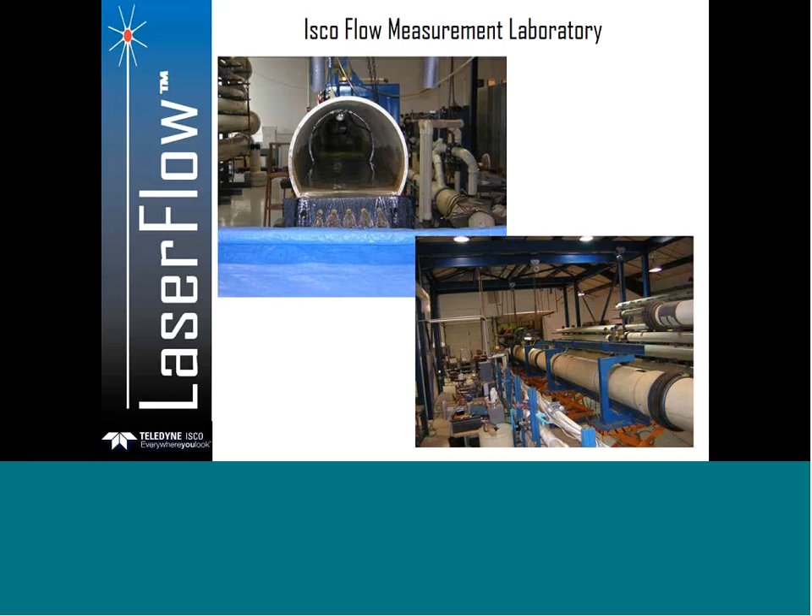Okay, let's do a quick review of area velocity flow measurement techniques. Q, your flow, is equal to the area of that flow times the velocity. To get the area measurement, we do a level measurement, and typically we use a pressure sensor. Those of you familiar with 2150s out there know we use a pressure sensor, but there are also ultrasonic sensors. In the case of laser, that's what we use to get our level measurement.

For our velocity component, we use a Doppler technique. There are some others out there, like electromagnetic, but for the most part Doppler is the predominant one in the industry. There are different types of Doppler velocity measurements - some are called contact sensors and some are non-contact. A 2150 contact sensor would be one that's mounted on a ring in a pipe, and the non-contact, of course, would be the laser.

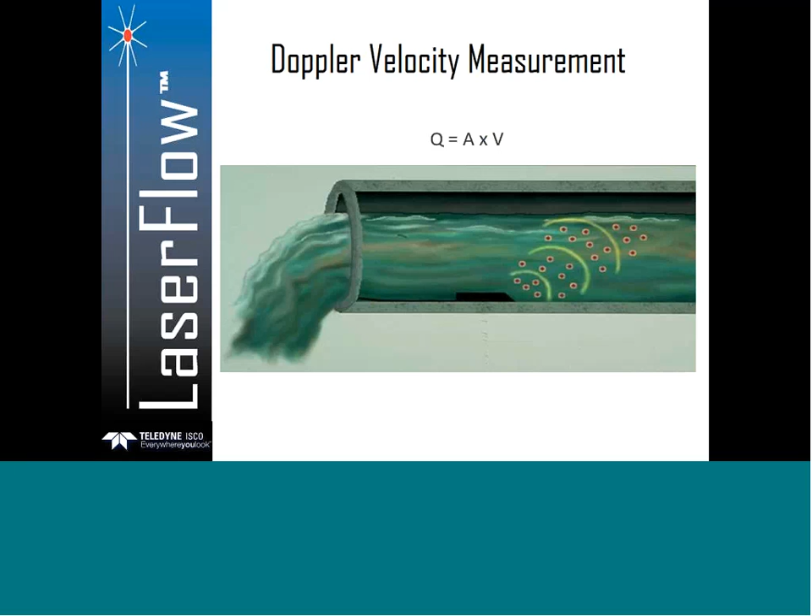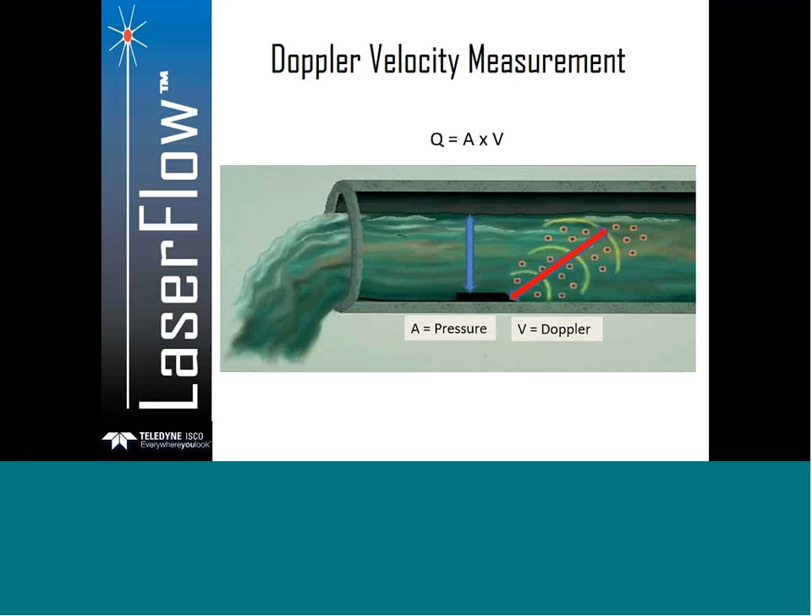This is a good little artist rendition of what we're talking about - a continuous wave area velocity sensor mounted on a ring in a pipe. To get the flow, we need the level, so we use a pressure sensor to measure the water depth, and we use a continuous wave Doppler sensor technique to measure the average velocity of the flow. These work very well and have been out there forever as the workhorse of the industry, but they do have some limitations to how effective and accurate they are as you get into deeper and deeper flows.

All right, so let's talk about some applications you might see in the industry. We design for collection systems, although we're more and more involved in wastewater plants as well as water plants. But initially, laser was designed for collection systems. We designed them for large pipes - we've defined large pipes as anything greater than 36 inches. And for small pipes, we find more and more applications all the time now where people are trying to measure flow in pipes smaller than 36 inches, a lot of times even as low as 6 and 8-inch pipes.

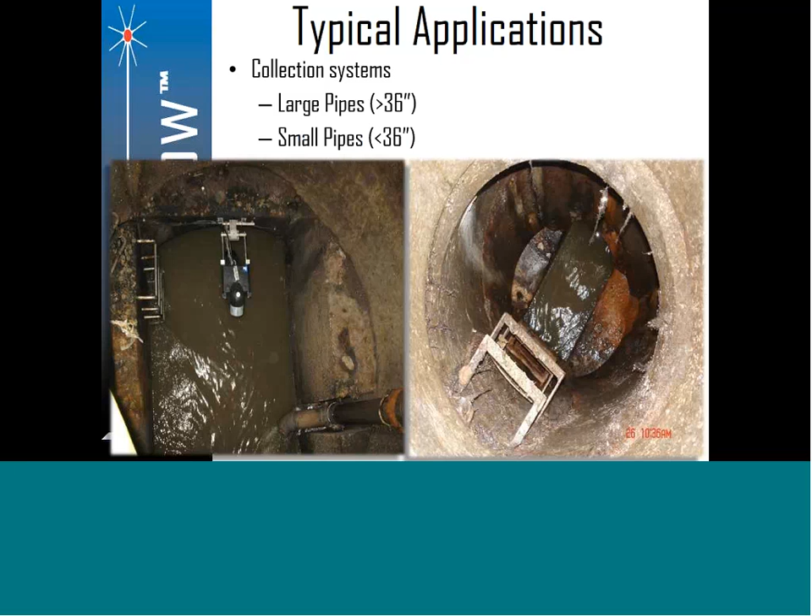So some applications we're going to talk about - the one on the left, you'll notice, is a large pipe, very dangerous; you don't want to get in that flow if you can help it. But the one on the right is more and more the residential or private property I&I monitoring that we're seeing out there. One thing we think we've done a pretty good job of is coming up with LaserFlow, and we feel that that truly is one of the keys to unlocking a successful monitoring program.

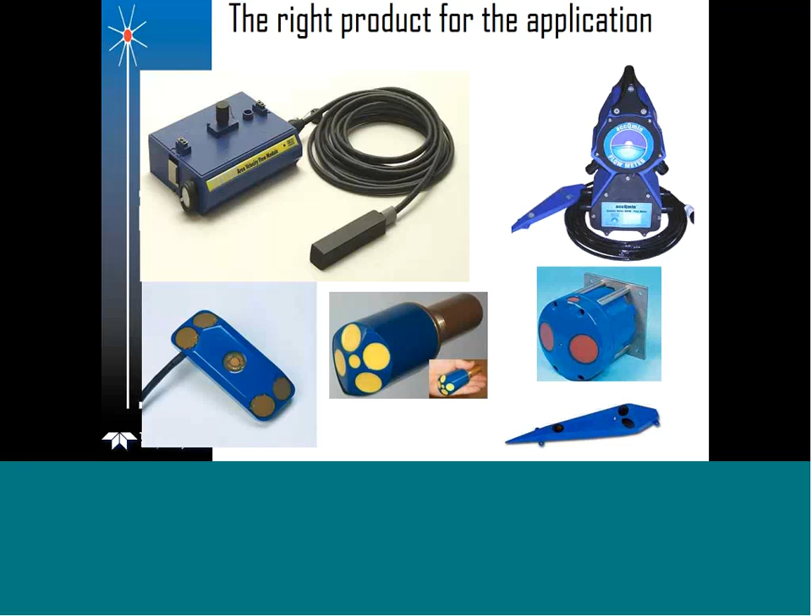However, with any application, we want to look at what your goals are, what the application is. I want to make sure we provide the right product for that application. Our field support people, our sales reps in the industry are probably the most trained in the world. They are very knowledgeable about product technology as well as applications, so they do a great job for you. We also have internal staff in our product support group who have a great deal of knowledge and expertise in these areas. Bottom line is we want to provide the product that's going to best suit you in your application.

We've always said not one size fits all. That's still true today, but I will say the LaserFlow is proving to be the closest thing I've seen in my 30-plus years of doing this to the one size fits all. Nothing's perfect, nothing fits every application, but the laser is about as close as it gets at this point.

Okay, so let's talk about the laser. Theory of operation - I'm going to go into more detail with this on individual components, but as an overview, what we do is we have an ultrasonic sensor mounted in the back of the laser. It transmits a sound wave, reflects off of a 22.5-degree deflector molded on the side, or in the back of the laser, and we know where the water depth is.

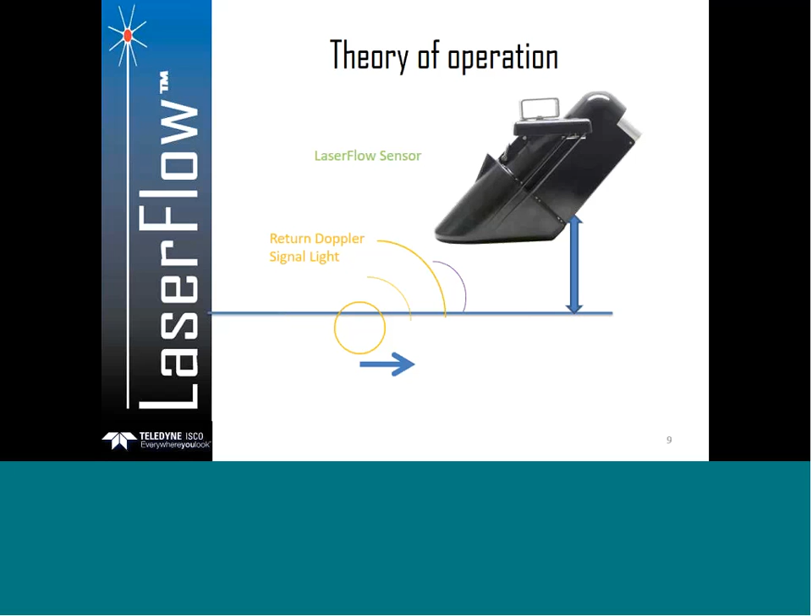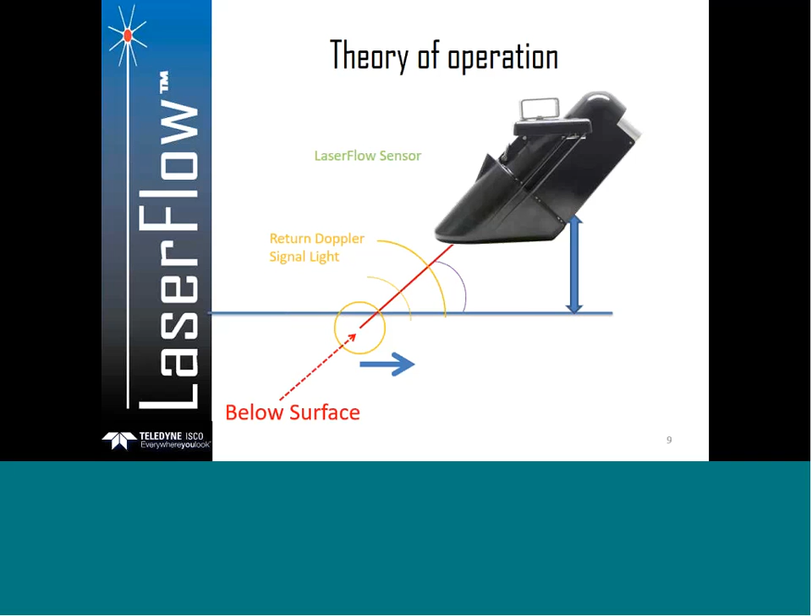Once we know where the water depth or water is, we know where we want to take our reading. We focus the laser below the surface of the water. This is key, and part of the patent of the laser is subsurface velocity measurement. There are other, I would say, me-too kind of products out there that do non-contact velocity, but all of those are surface velocity. Laser is the only one that actually goes below the surface to get the velocity reading.

Before we get into the laser velocity, let's talk about the operation of the ultrasonic sensor. One thing we try to do here at Teledyne Isco is really look at what is currently available in the market, things that people do right, and maybe areas that we can improve. One of those areas was the ultrasonic sensor, and you have both the velocity measurement as well as level.

So what we did on the ultrasonic sensor was we heard comments that if the sensor is mounted straight up and down, you could have condensation cling to the face of the sensor. What we did on the laser design is we went in and put that sensor in the back of the sensor housing, and we angled it. What that does is any moisture in a manhole, which we know is common in a manhole environment, will drip right off the edge of that sensor and not cause a problem. Also, if that sensor does go underwater, it will just run right off once the submergence goes away, and away we go with our level measurement.

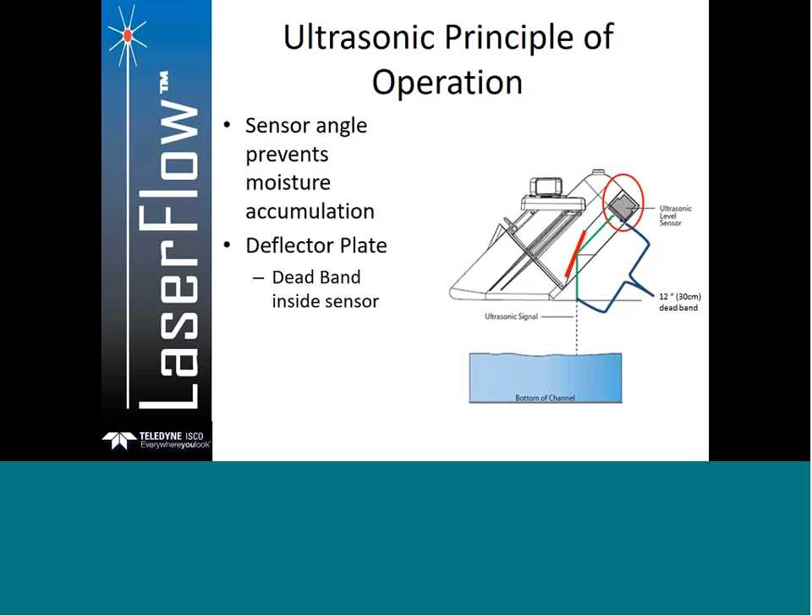Again, we shoot off that deflector plate. One other thing we've done is looked closely at a deadband. A deadband is a blanking distance from the ultrasonic sensor face to a known distance. In the industry, it's very common to have a 12-inch deadband, and we have one in this sensor. So what we want to do is minimize that effect, and the way we've done that is by putting the ultrasonic in the back of the laser sensor, and now we take into account that 12-inch deadband in the body of the sensor itself. For that reason, we now have virtually a zero deadband ultrasonic, so water can go all the way up to the bottom of the laser before it will not read level.

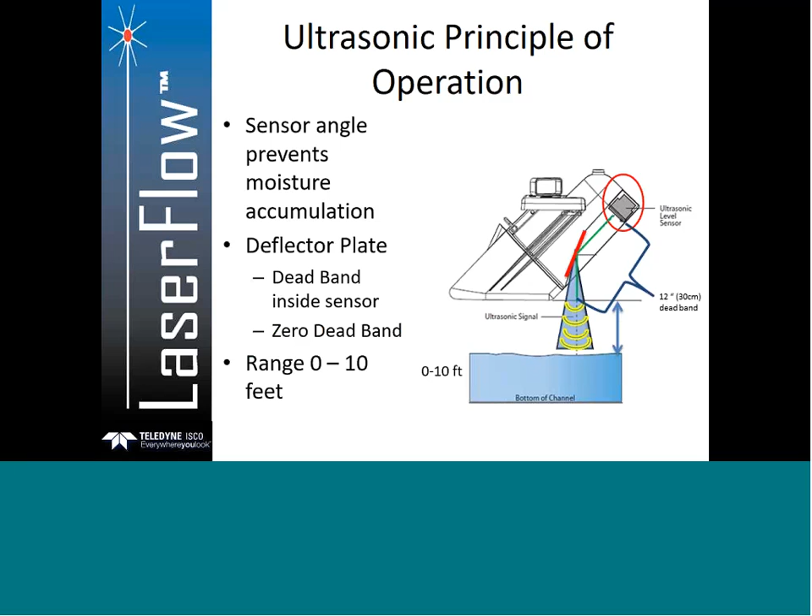We have a range of 0 to 10 feet, so for 98%, 99% of the applications we deal with, this handles that range quite well. We don't care if it's a foot away or 10 feet away from the flow. All right, so that's the ultrasonic level sensor, and again, it's been very, very successful for us.

Let's talk about the laser itself, though. A laser pointer has a constant focal point, which means our focus point goes on and on, pretty much to infinity. The way the laser works, though, is we need to focus that laser signal or the laser beam into a known point so that we can get a good representation of the water velocity. So what we do is we know where the water surface is, and we know where we want to focus the laser.

We basically move the laser until we get the smallest point or tightest focal point on the laser beam. What that does for us is give the maximum intensity or signal energy back to the laser. Like any Doppler device, we transmit a known frequency, and based on the frequency return or shift, we can calculate the direction and magnitude of the velocity reading.

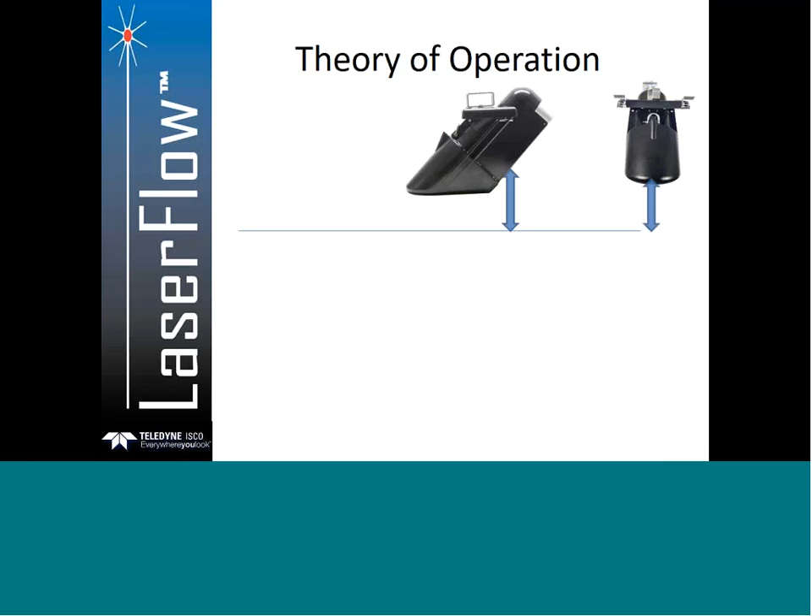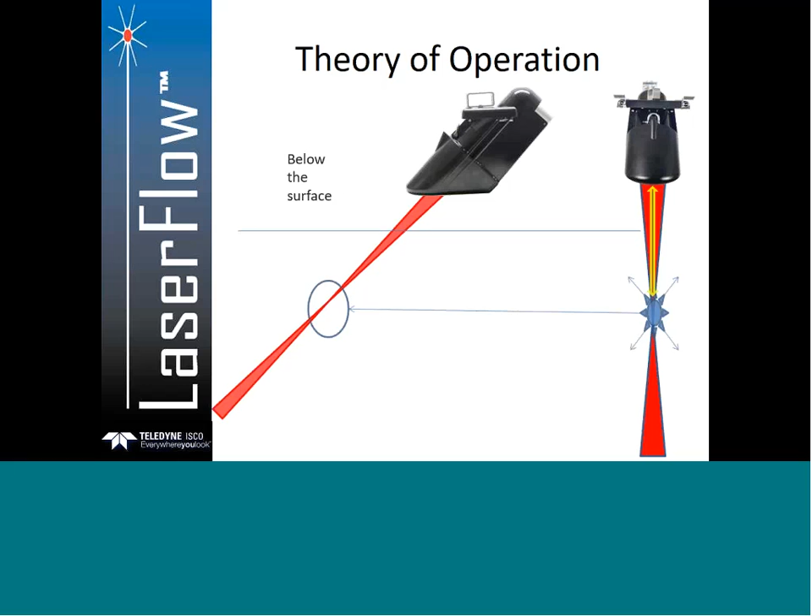To give you another look at what this does: the laser knows the water level, knows where it's at. Once it knows where it is, we focus the laser below the surface. This is a little exaggerated, but if you stuck your hand under the laser in operation, the beam coming out is about the size of a coin. Where it focuses, though, is a very tight laser-like point below the surface of the water, known as the converging section or point of convergence, which is key. This is where we want to look for our velocity readings.

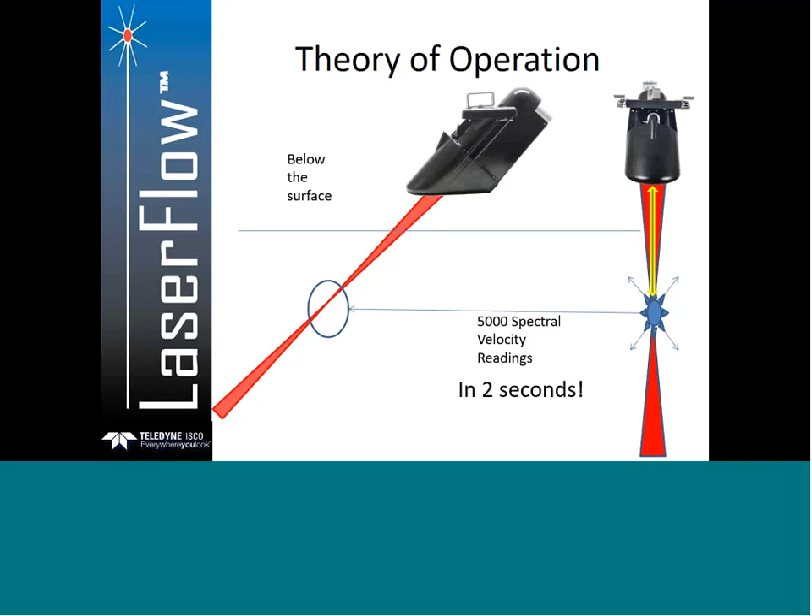What's amazing is we take 5,000 spectral velocity readings, and we do this in roughly 2 seconds. By comparison, going on the concept of continuous improvement, Laser 1, released in early 2014, took about 40 to 45 seconds to do the same 5,000 velocity spectrum scans. The firmware's been updated and improved, and now we do all of this in 2 seconds. So a lot of improvements have taken place since the early release. Some of you who worked with the laser early on will notice a distinct difference in performance.

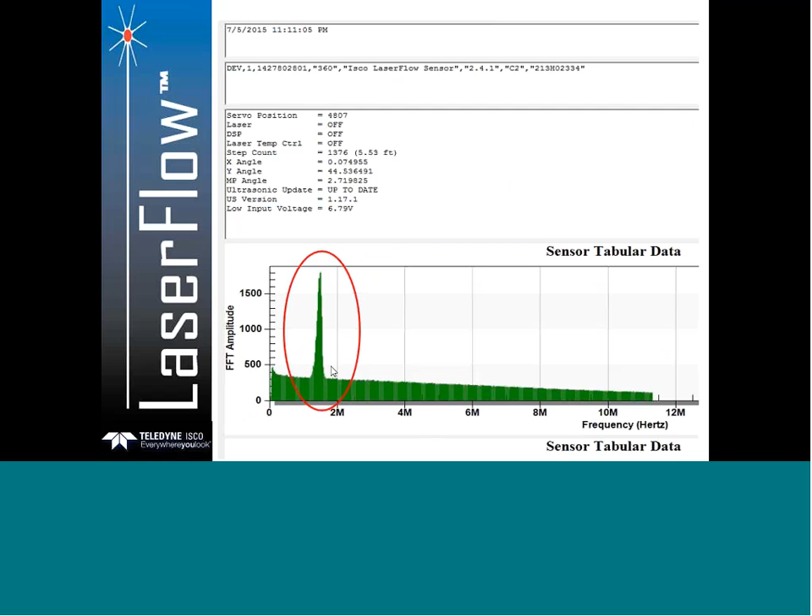Okay, this is really what it's all about: this is the velocity spectrum. If you look at my cursor, you can see zero velocity. To the right is the frequency, or the speed of the water. This peak is what we're really looking for. It's made up of those 5,000 velocity scans. The more of those 5,000 that agree on that frequency, the more area under the curve, and the better looking this signal will be. This is very key in setting up a laser as well as post-processing laser data. When I look at this, I have no question we are getting a very good velocity reading at that location.

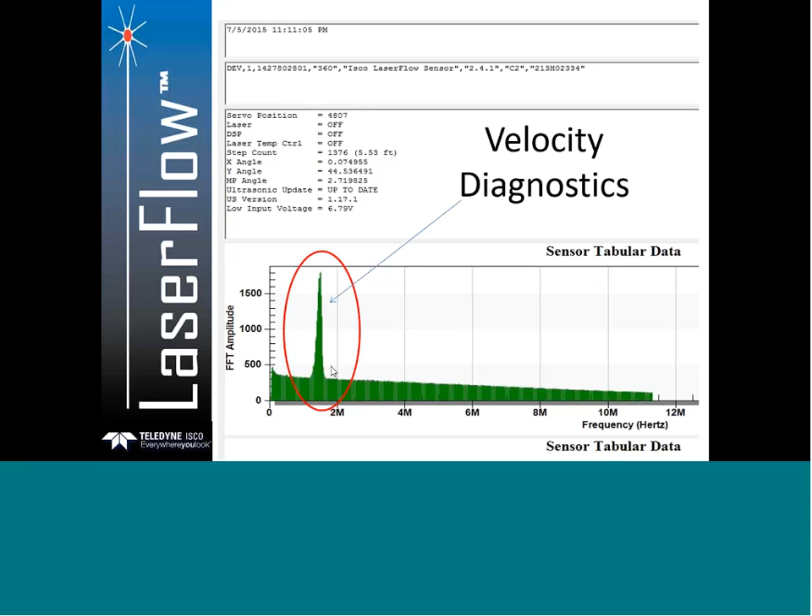These are known as velocity diagnostics. We are a little bit overkill sometimes on velocity diagnostics. Everybody can give you a nice pretty line and a nice pretty graph, but what we're really keyed into is how good that number is, and the velocity diagnostics help you determine that.

Okay, so this is another snapshot of what you'll get from the laser. One reason we're able to read clean and slow water is the signal-to-noise ratio. Any Doppler device, whether it's a sensor in the water or a laser, it's all about the signal-to-noise ratio. The laser has incredibly clean signal compared to the noise. So that's what we're looking for right there.

That is our return spectrum, made up of 5,000 velocity readings. This is the noise floor. As we go towards the left, towards zero, that is zero velocity. Laser vintage 1, 4 years ago, 3.5 years ago, that noise floor was considerably higher. That meant the minimum velocity we could read then was about 0.8 feet per second. We can now read down to our new specified 0.5 feet per second, and in some cases, actually a lot of cases, we'll read even slower than that. So it's all about signal-to-noise ratio.

Some of the engineers were able to figure out some things. They cleaned up the electronics, and now the new laser you'd buy today is further improved.

This is really a measurement of the quality of the velocity reading. It's also a value we quantify as Doppler power, which is stored in memory. When you graph that Doppler power, the value we're looking for is anything greater than 1,000. As long as we have 1,000 or higher Doppler power, we know we're getting a sufficient amount of return from that spectrum, and we like what we see. This is very key information — it's like an MRI, as corny as that sounds, when you're looking at a laser velocity reading.

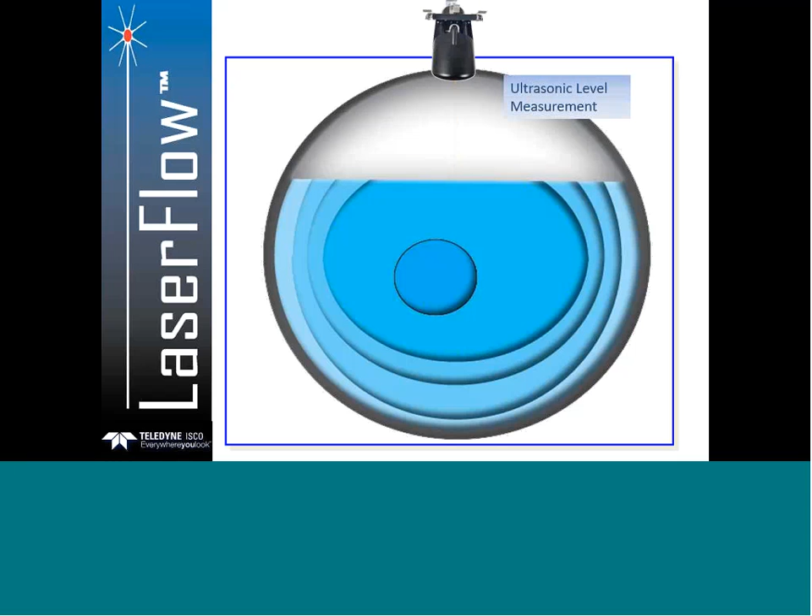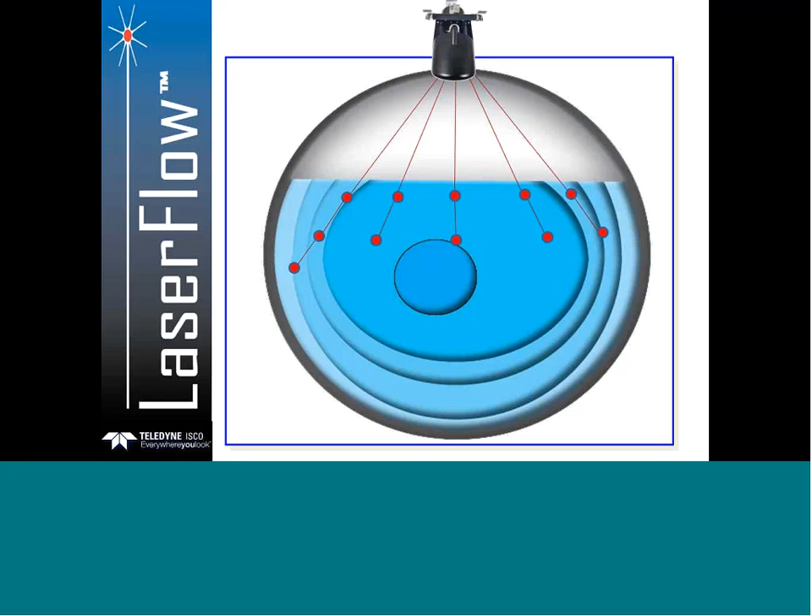So the laser can be set up. It reads the level, knows where the water is. Once it knows where the water is, it can then start taking its velocity readings. It's able to scan horizontally 5 points as well as vertically 3 points. This is known as a multi-point, multi-depth velocity method.

The laser is very unique in that it can take readings from multiple points throughout the channel without being in the channel or the flow.

Each one of those, keep in mind, is 5,000 velocity readings. So if you do the math, with 15 points you're really taking about 75,000 velocity readings, and it does all that in roughly a minute and a half.

I often get questioned, why wouldn't I do all, or when would I do individual ones? It really comes down to power. How am I going to power this thing? Is it remote? Am I on batteries, AC powered? Is it billing? How fast do I want readings? All those come into play.

So if it's a remote location, what I'll do is turn all 15 on and see how uniform my velocity is. If things look fairly uniform, a lot of times I'll just put 2 on. The reason I do 2 is so I have a second opinion. If something comes floating by at the time it takes one reading and gets a bad reading, I want it to have another chance of getting a good reading. But this is completely user definable.

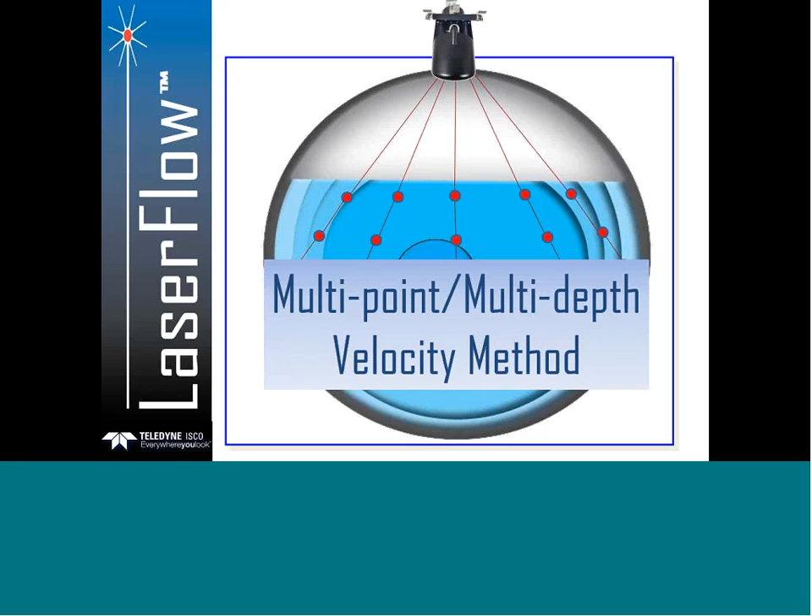All right, so let's talk about accuracy. We've done a lot of field testing in the marketplace, and these are all really customer tests, and we've had incredibly impressive results.

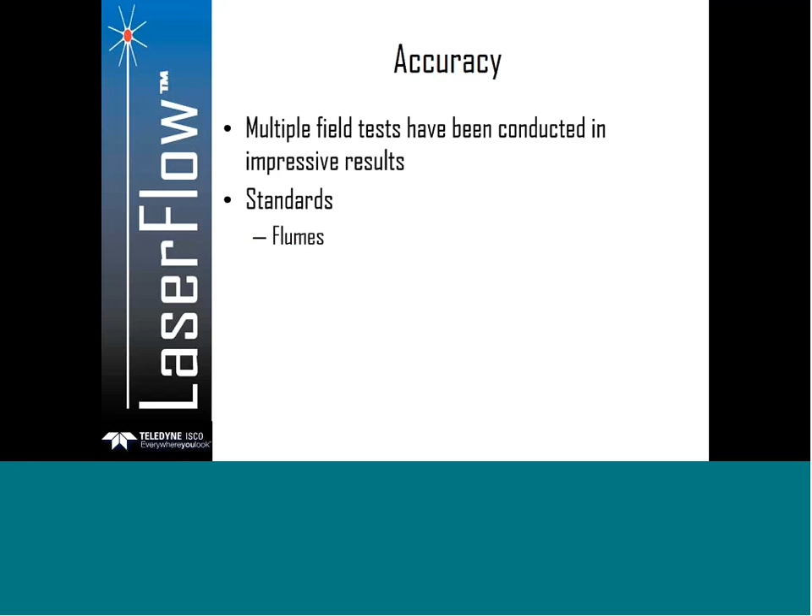Some of the standards they've been compared to, as you're all familiar with, flumes. Flumes have been out there forever. Flumes are traditionally expected to be roughly a 5% accurate device if they're installed correctly and all conditions are right. What I'm finding is that flumes are not always right, and just because you pull out your Isco handbook and look at the level reading and it did the math right doesn't necessarily mean the flume is right. So more and more lasers will be used to verify the accuracy of flumes, but flumes have been compared to laser over the past several years.

Magnetic flow meters, another one that's popular out there. Obviously, mag flow meters need a full pipe for the most part, but we've been compared to a lot of those mag meter applications as well.

Acoustic Doppler, or ADFM, range-gated Doppler. For those of you that have been doing this for a while, MGD might come to mind. These are pulse Doppler devices that measure a velocity profile through the channel. We've been compared to those as well. We sell those or offer those as a product, and the laser compares very favorably to that technology.

Transit time, or multi-path transit time, there are multiple sensors in a pipe that measure the velocity distribution as well. Also considered to be a very accurate standard, and we did quite well with those.

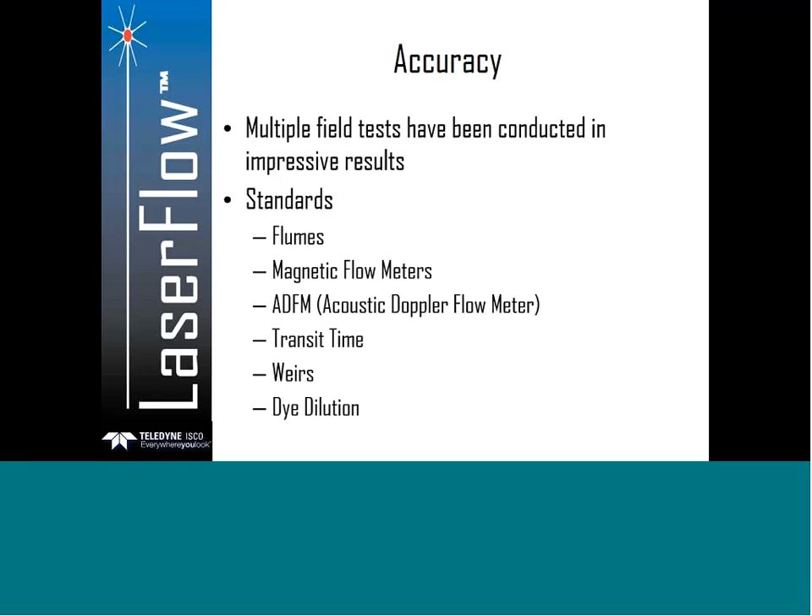You have weirs out there. Weirs have been around since the dawn of time. We know a level reading, we know the shape of the weir, and we can calculate the flow. Again, roughly a 5% device. And then there are dye dilution tests that have been done compared to the laser as well, and it's done very well in every one of these comparisons or standards.

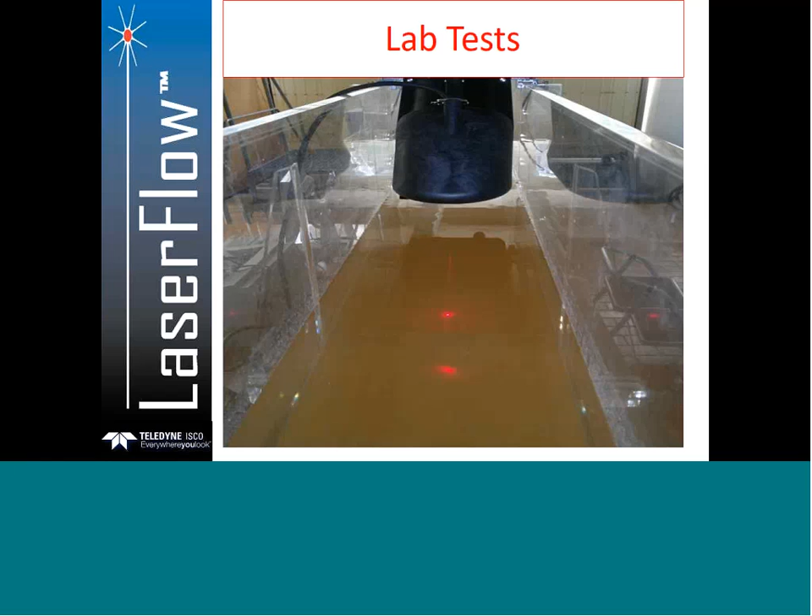Okay, so then you finally get to, well, how do you do against the lab? Let's do some lab testing and see how we do. This is kind of an interesting photo, I thought I'd throw that up there. It's actually showing 2 laser points, but in reality it's one. You'll see the top one's hitting the water, and the one at the bottom is actually hitting the bottom of the channel.

So, accuracy. Our current published specified accuracy is 4% of reading, which I should mention is the most accurate non-contact velocity or flow spec in the industry.

We have done third-party test results. We did some testing with a facility called the Irrigation Training and Research Facility at Cal Poly San Luis Obispo, California. They are very well respected and known in the industry out there on the West Coast. We were found to be at about 1.8% absolute error, so we did very, very well in their testing.

We also went to the East Coast, to another facility called the Alden Research Lab. Alden is another very well-respected flow lab on the East Coast, with a little different setup there. We were at 2.7% absolute error. So in addition to all the field testing that's been done, we now have third-party results that support the accuracy of the laser, well within our 4% spec.

Okay, so let's talk about some difficult applications. There are many out there, and we're finding more and more all the time. High velocity, low level is a common one. Where you find those are in steep slope pipes. Since the laser came out, I'm amazed at how many of these types of applications we run into these days, and I'm going to talk about how we're able to overcome some of these challenges.

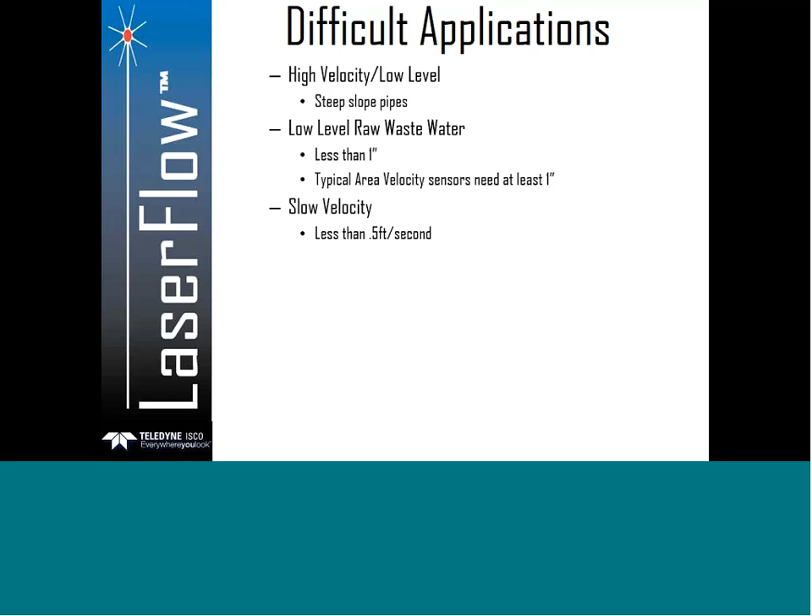In many cases we run into sites much lower even than that, and the laser will work quite well. We find these a lot in residential collection systems, and we're seeing a lot more private property or personal property I&I studies going on, with some of these applications. Slow velocity also has a tendency to silt over a sensor, so it becomes a challenging thing if you have a sensor on a ring in the pipe.

Slow and clean applications - I'm talking about wastewater effluent, sometimes not necessarily slow, but it's going to be very clean. Chlorine contact or UV disinfection channels - these are another part of the application market we are becoming more and more involved in. People want to measure the chlorine contact chambers and UV channels, and there's nothing out there that's been able to do that effectively until laser.

Drinking water plant effluent - we have more and more applications where, not only dirty water, but clean water, they want to measure what's coming into the plant. The water tends to be fairly clean, and a traditional sensor a lot of times will have a difficult time measuring that. Stormwater monitoring isn't going away, it seems to be picking up.

Stormwater challenges include wide fluctuation in flow conditions. So you may have very low flow or no flow, and then you could have a raging rapid when things happen. So those are challenges. Irregular shaped channels - almost all stormwater lines, unless they have a good defined circular concrete culvert, will run into some irregular channels. I'm going to show you how we can deal with those as well.

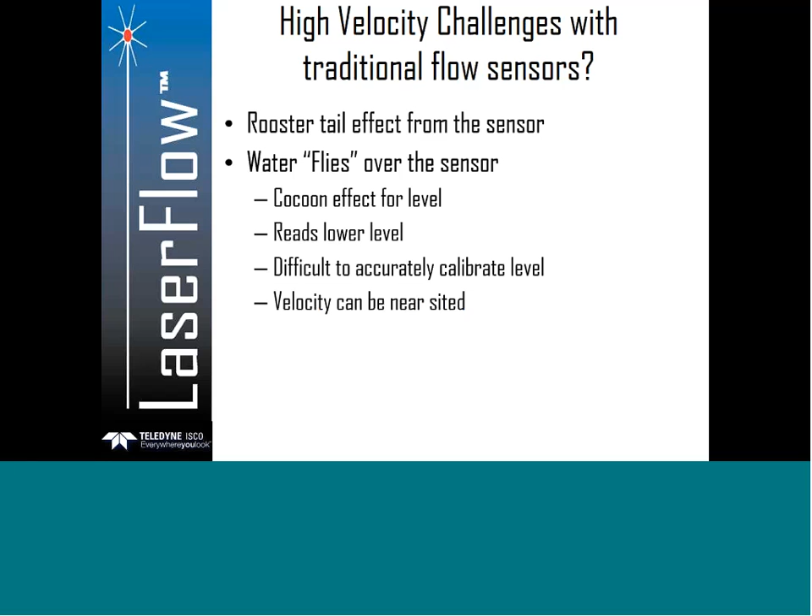That water's moving through there at 4, 5, 6 feet per second. Sticking a ruler in there is not a fun experience, and it's very, very difficult to calibrate. When we have that much stuff coming at a sensor, an area velocity sensor, you have a lot of entrained air, a lot of particles moving at very high velocity, which can tend to make the sensor slightly nearsighted, affecting the overall accuracy of the velocity due to some of the noisy water hydraulics.

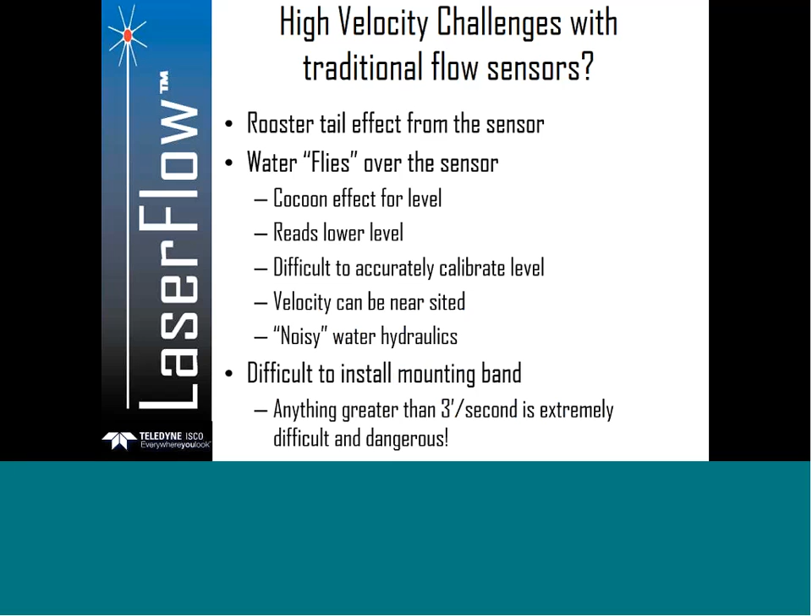And as you know as well, there's difficulty in installing a mounting band. The people I've talked to out there that do this for a living have told me, as a general rule, if it's 3 feet per second or greater, it's going to be very, very difficult, if not impossible, to install a ring, as well as being extremely dangerous. Nobody wants to be in flows with those types of conditions.

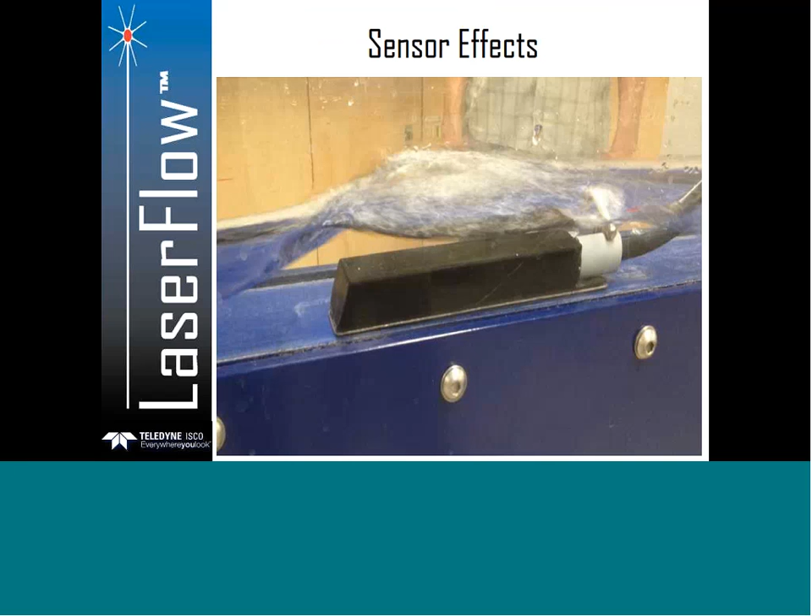This is kind of a neat shot I liked. It was from a lab in Europe, but you can see just the hydraulic effect of high velocity over a sensor that's in the flow stream.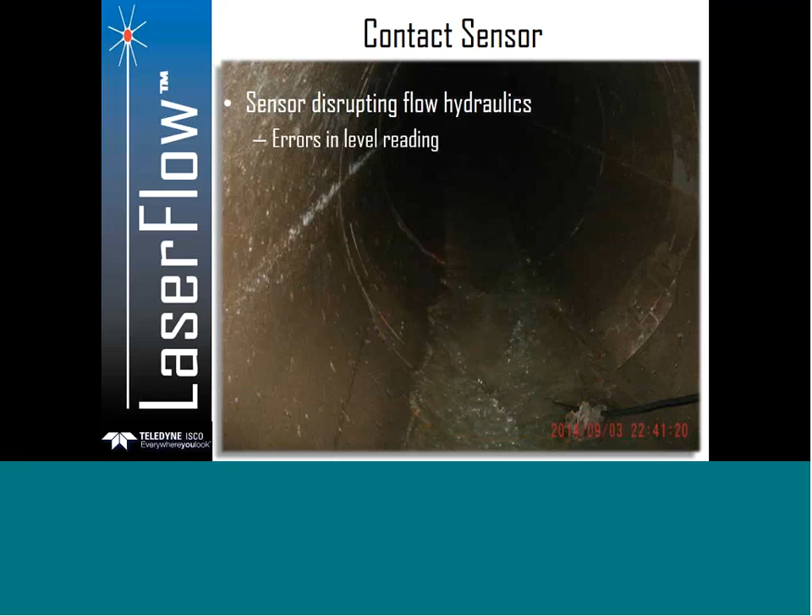Okay, this one was a good photo. It's a little difficult to see, but if you look up in there, way up before that first pipe connection, the flow is very uniform hydraulics. Once it gets closer and hits that first pipe joint and then the ring, it starts getting very turbulent. What's going to happen is you're going to have errors in both level as well as the velocity readings, and then your cable is going to come loose from the band eventually due to high velocity.

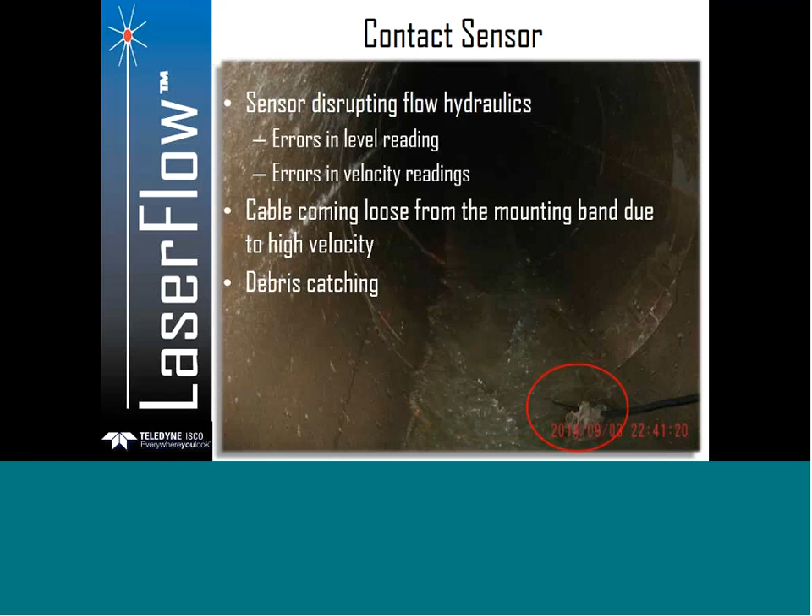All cables used, or cable ties, are not going to last forever. So in a case like this, if it's a long-term plan, there's a good chance it's going to come loose, you're going to catch debris, and all those things. So any contact sensor could suffer from these types of issues.

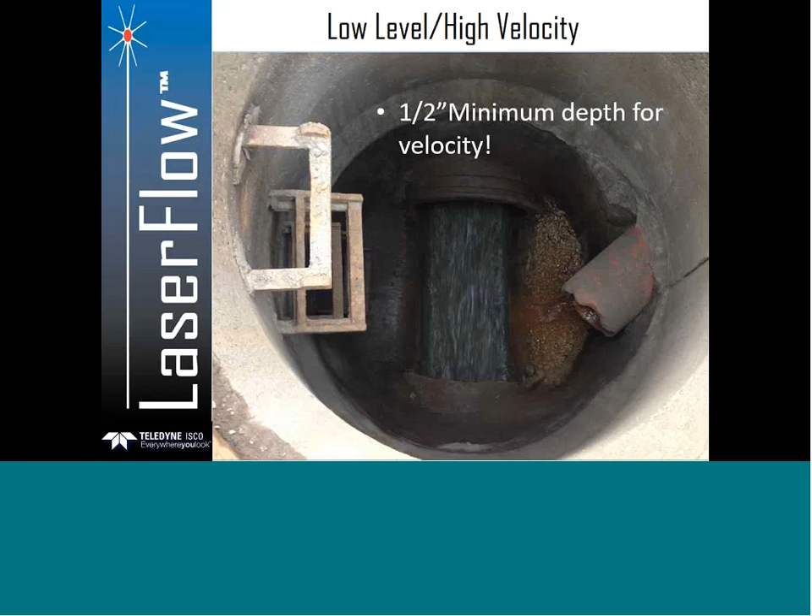So let's look at another application. This is a low-level, high-velocity application. Level is, in this case, below an inch. The specification for the laser right now is we can read velocity down to a half an inch per our specification. Having said that, we have cases where we've actually read much lower than even a half an inch. Our velocity spec is 15 feet per second, so we can read all the way up to 15 feet per second.

So this is a high-velocity billing application. They decided there's no way you could put an in-pipe sensor in there due to both the hydraulics, the depth of water, and the velocity. So what we did is we went ahead, they bought a laser, 2 bolts hold it in place. It makes it very easy to install in this location. It should be noted that the laser can be installed both upstream and downstream.

It doesn't care which direction, and it can read bidirectional flow. So very, very capable technology. It also has a built-in accelerometer, so it knows its X, Y axis. So when they install it, you can tell exactly where that laser is positioned. X is 0 plus or minus 3 degrees, Y is 45 plus or minus 3.

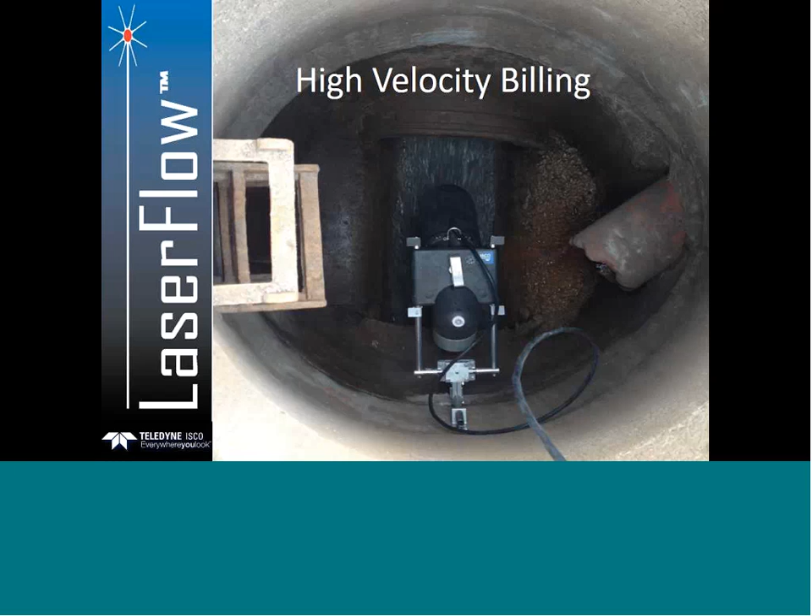The Y angle can affect the accuracy of the velocity reading. What's unique about the laser is that it knows where it's physically mounted. So if the install is not exactly perfect, it will compensate for that error with the built-in accelerometer, further tuning your accuracy.

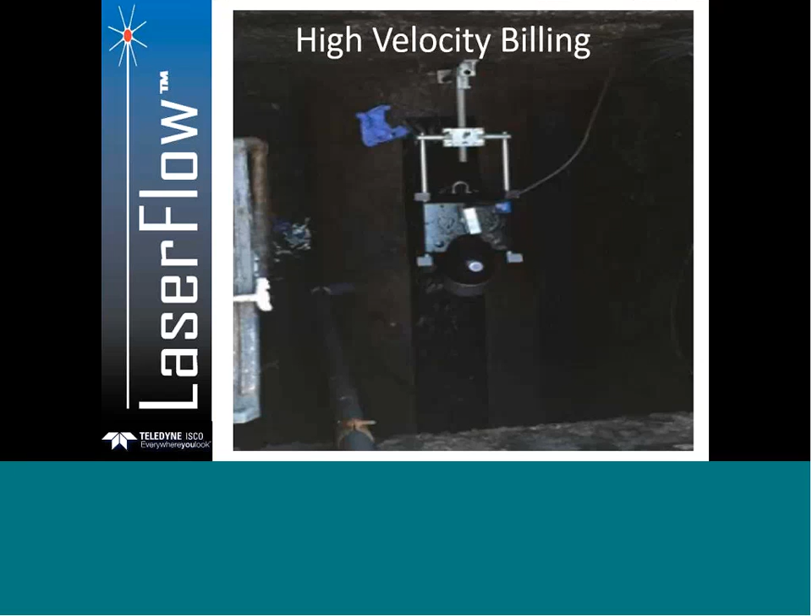Okay, so here's another site that was a high-velocity billing location. This one happened to be a closed pipe. They did not really have an open channel here like a normal invert. What they were able to do is just make a small cut in the pipe. So they have a round pipe coming in. This one happened to be a steel pipe.

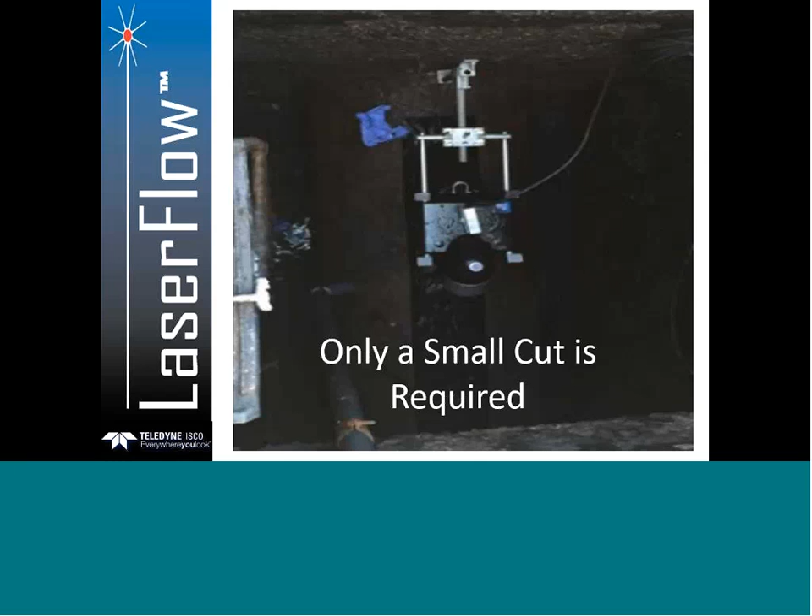They can make a relatively small opening in the very top of that, and now they mount the laser over it. They're not putting anything in that flow. They can read level and velocity without having to do a lot of construction to make this work. So very easy to adapt to some of these applications.

Okay, so Multipoint, this is a high-velocity site that was actually in Canada. You'll notice here it's meters per second, but this is 4.29 meters per second. We went ahead and did a velocity setup. We set up, in this case, 3 points, 1, 3, and 5 for the velocity distribution. We could have turned on all 15. We chose 3 because the flow, even being as turbulent as it is, was relatively uniform, but it is really moving.

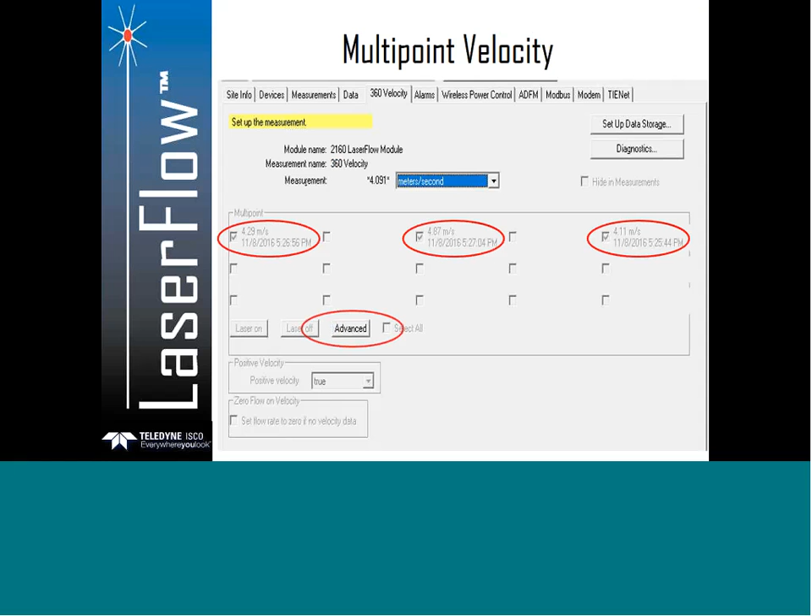Some of the advances we made in the laser from day one was what we call steep slope focusing, or steep slope mode. So if I have a very steep pipe, I may be working with an inch or less, right in that range of level. Very difficult to read that. In the laser, we're able to set up the steep slope mode. In this case, it was a 15% slope, and now we were able to read very accurately the level and velocity in this line and give them accurate data for this type of high-velocity billing location.

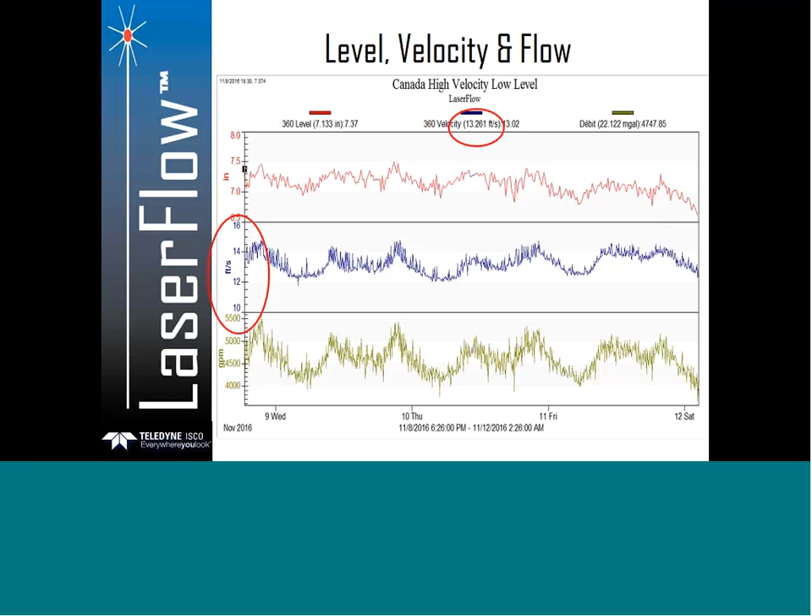Okay, let's talk about some other applications. This is a wastewater effluent discharge, and again we get that a lot because people want to measure that. There are a lot of flumes and weirs out there on wastewater effluent. A lot of times those are not accurate, and customers know that. They want a better way to do it.

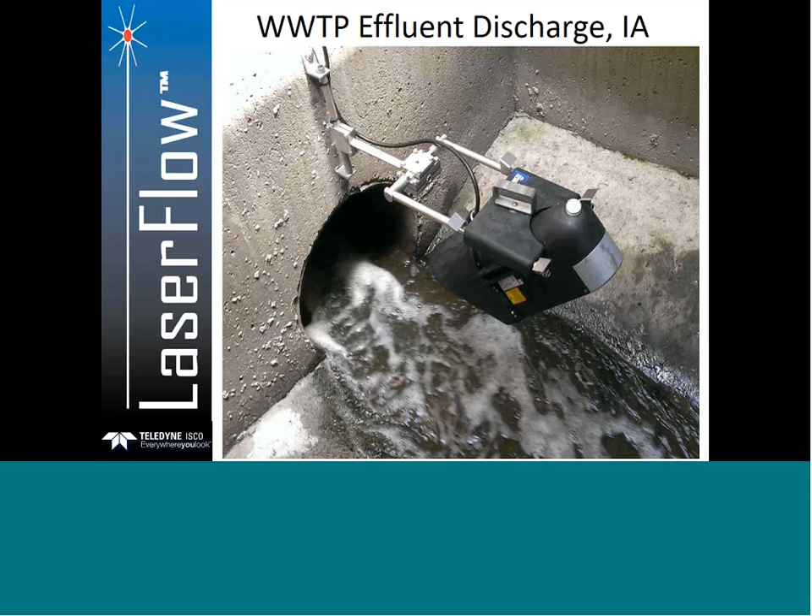So we went ahead and put the laser in some of those locations. The key thing is that we're able to, with the diagnostics, see how much of the signal we're getting back with the laser spectrum, and we know if we're able to read it or not. In this case, we were able to read very clean water, a little bit of turbulence, a little bit of foam, and the laser did very well.

Here's one that's a UV disinfection channel. More and more people want to measure the UV channel in order to more accurately dose or pace their UV system. In this case, we have a signature flow meter that is giving a 4 to 20 level, so they know what level is going on in that channel to maintain the proper level over their lights. The velocity, so they can control how fast it's moving to make sure they have the right amount of exposure time, as well as flow rate, so they can dose or pace the light intensity.

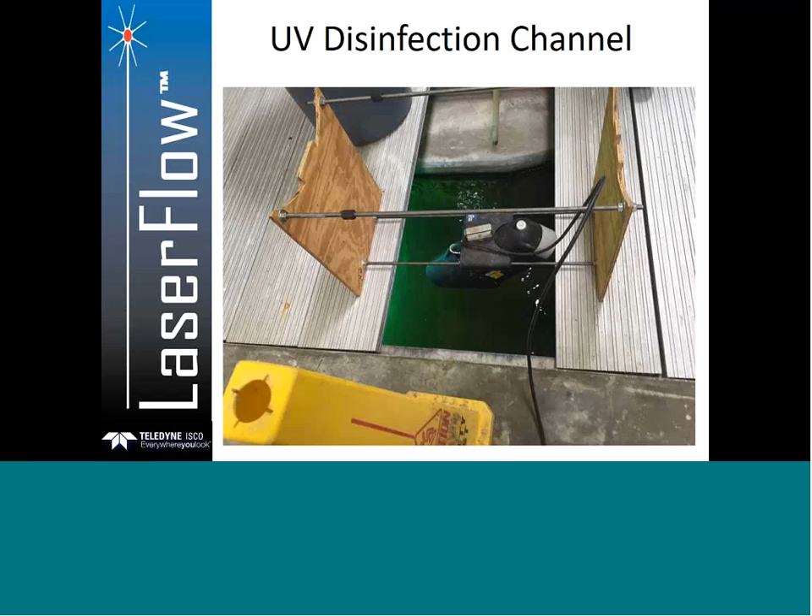So really the laser coupled with the signature flow meter is almost a UV disinfection RTU or controller. Incredibly beneficial in that location.

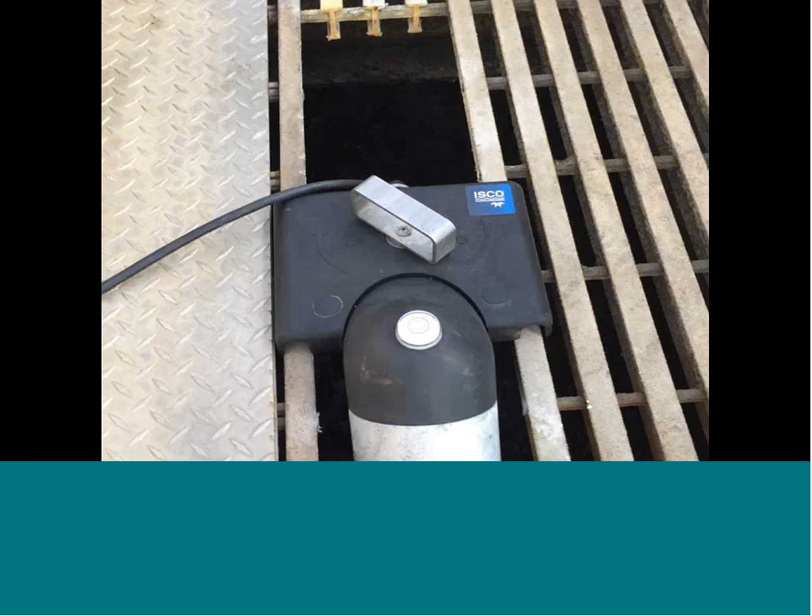To install in something like that, though, what's nice is that it's pretty easy to do. In this case, what they did is they just went ahead and cut out an opening in the top of that grate, and they just set the laser right on that, and away they go. So easy to adapt in some of those applications.

Here was another application challenge. This is a drop pipe application, happened to be in Istanbul, Turkey. I was out there - they wanted to measure flow coming out of this line. Nobody wanted to get in there - very dangerous, very nasty chemicals in there.

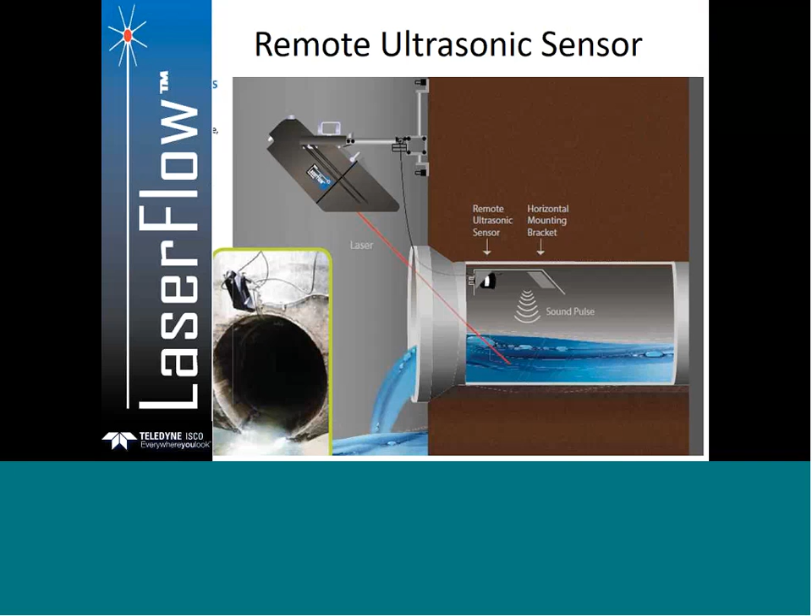The first laser was not going to work, because it was going to read level directly below it and then try to focus the laser into the bottom of the pipe. What we have done is designed a remote ultrasonic sensor, and what that does is now the ultrasonic itself is mounted up into the top of the pipe, so it can either be on a ring or bolted to the top of the pipe. It measures the depth in the same location now that it's measuring the velocity. So a much more accurate method of reading flow, as well as compensating for some of these application challenges.

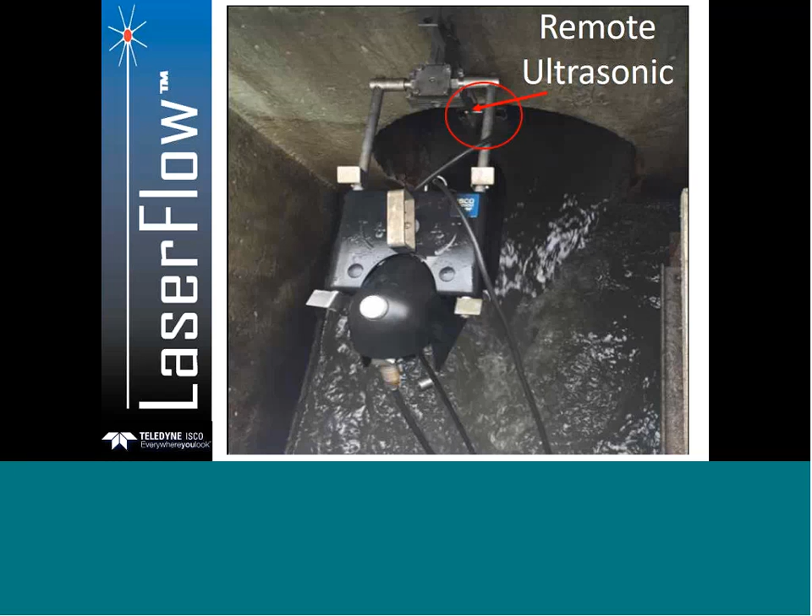This is one at an influent wastewater plant. You can see that the water is actually flowing out of that pipe and dropping into the rectangular channel. Using the remote ultrasonic, we don't care what it's doing in that location - it's able to read that application.

This is a combined sewer line, and what they were doing here is trying to measure flow, which is sanitary on the baseline - that was important to them. Because of the normal laser, the ultrasonic would be reading straight below it, and it would have tried to focus the laser under the pipe, which was not going to work. So we installed a remote ultrasonic up into that pipe, and now we are focusing the laser in the right location. The laser in this application can read both a really low-level baseline flow accurately, as well as when it goes full pipe.

So we see this again used in a lot of combined sewer outfalls or overflows. This happened to be a relatively small one, but we do see some large CSO lines that are still out there. So a good technique, good technology. Nobody wants to put anything in that flow.

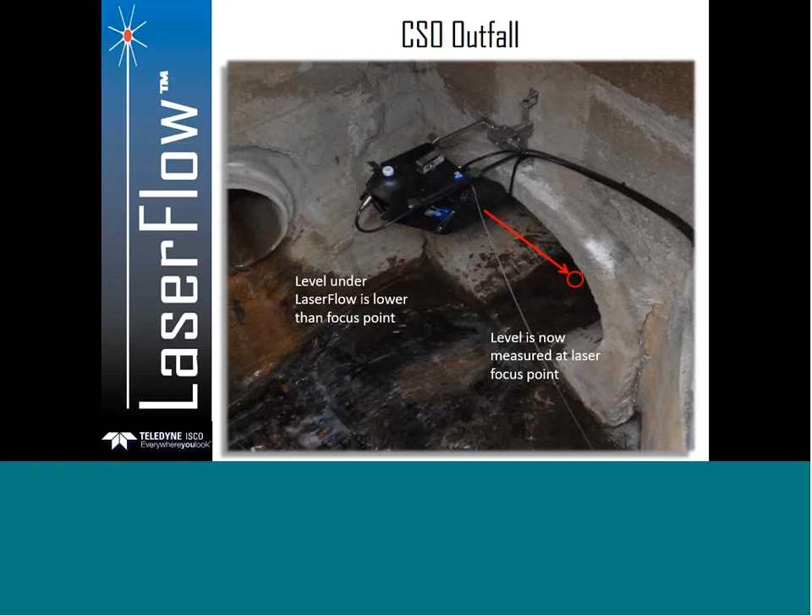Okay, more and more applications now. We're seeing a change in the channel shape or angle coming through that manhole. This is not so bad. This is actually a relatively decent location, but they wanted to measure flow here. We have some cases where it almost takes a 90-degree bend in that manhole.

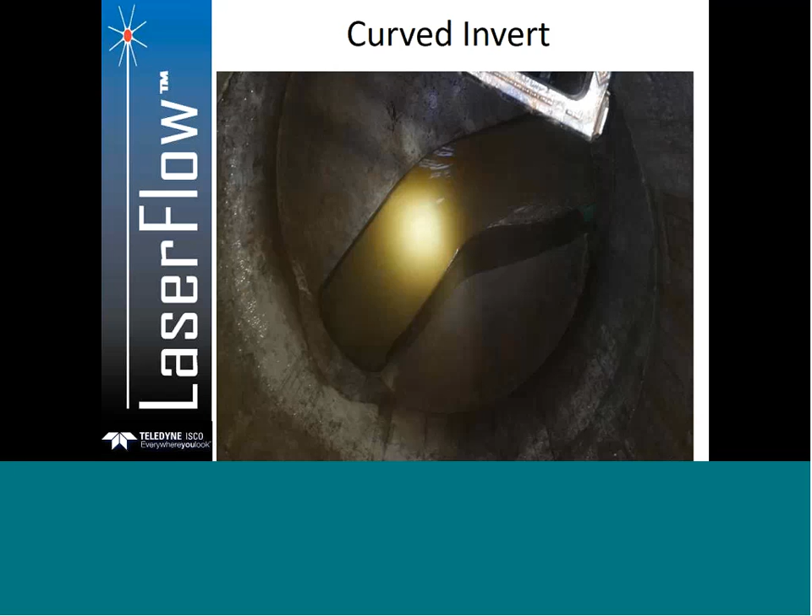Well, the standard laser in this location would have probably worked okay because it would use the ultrasonic about where that light is, and it would focus the laser up into that pipe. But some of these are not so ideal. In this case, what we've done is we were able to use the remote ultrasonic and mount it as it comes into that channel. The laser will now focus right where the ultrasonic is shooting, and we don't care what happens.

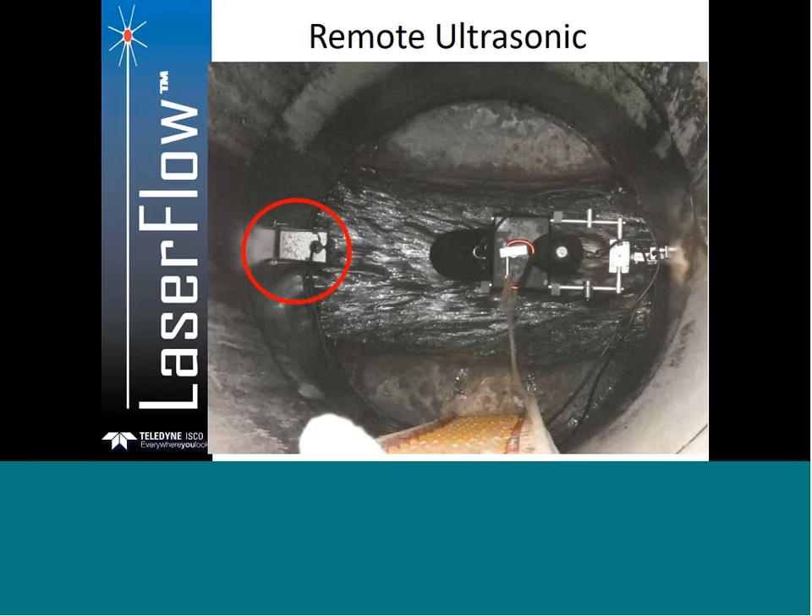In this case, it was high velocity. The pipe dimensions changed as it entered the manhole or went through the manhole, so the invert did not match the pipe dimensions. This is going to now allow the laser to be used in a lot of these applications that were very, very difficult, if not impossible, to read in the past.

Okay, so let's look at some other applications. River monitoring, we see a lot more and more of that. Why do we see challenges there? Well, a lot of them will run low flow to raging rapids during storm events. What happens there, you got to put, if you do an in-channel sensor, you have cables to worry about. You also have some inaccuracies due to the type of technologies.

You may have a sensor that will read very well at low end, maybe a foot to 2 foot deep, but will be very inaccurate at the high end. The high-end sensors might do well at the upper level, but not at the low end.

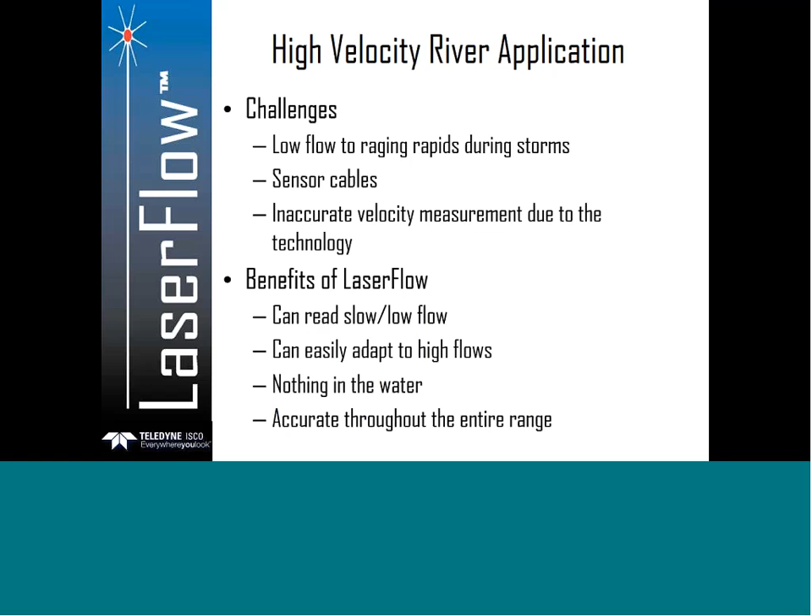So the benefit of the laser is a couple-fold. It can read both slow and low flow. It doesn't care really how slow that water is, and a lot of these can move very slow and can also be very low. But regardless of that, it can immediately adapt to high-flow situations. And because nothing's in the water, we don't have to worry about anything getting torn out. And it will be accurate throughout the entire range. So that's the real huge benefit of the laser - where it's looking, regardless of low level, high level, it will automatically adapt to those conditions.

Okay, here's another channel where we see a lot more on the west coast of the U.S., Southern Cal, Phoenix area. And what these are - big, wide rectangular channels that normally flow, if they flow at all, a very small channel right in the middle of that big, wide rectangular channel. The challenge is, what are you going to use to measure this?

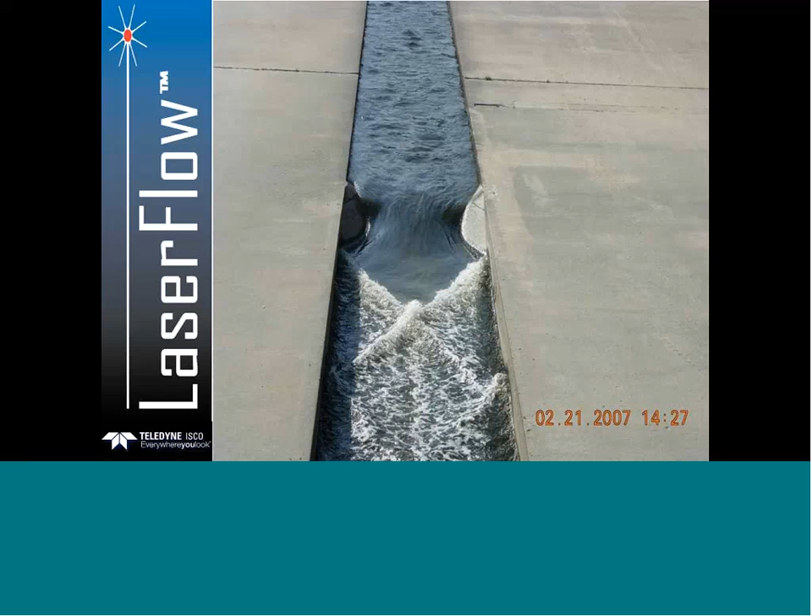Well, in the case of the laser, we can use a laser on a bridge. We can measure the flow level velocity very accurately right in that channel, upstream from where this little depression is, but we can measure it very accurately there. When the flows do pick up and now we overflow the sidewalls of that, we can use level to area data points to cover that entire channel shape.

So the laser velocity in this case would be used to measure the center channel and again apply the level to area data points. It should be known that the laser is not going to read the entire width of that channel. And so if you really wanted to get a better reading, you might add 1 or 2 more lasers to the other parts of that channel. In the case of the signature flow meter, we can add that easily to 1 electronic flow device.

Okay, slow velocity applications. More and more of these slow velocity lines we're running into. We talk about velocities that are less than half a foot per second, again, are very, very difficult. Most sensors cannot read or distinguish signal from noise. That's very prevalent in clean water as well. Laser has a very high signal to noise ratio. We can read extremely low velocities, in some cases far below the specified 0.5.

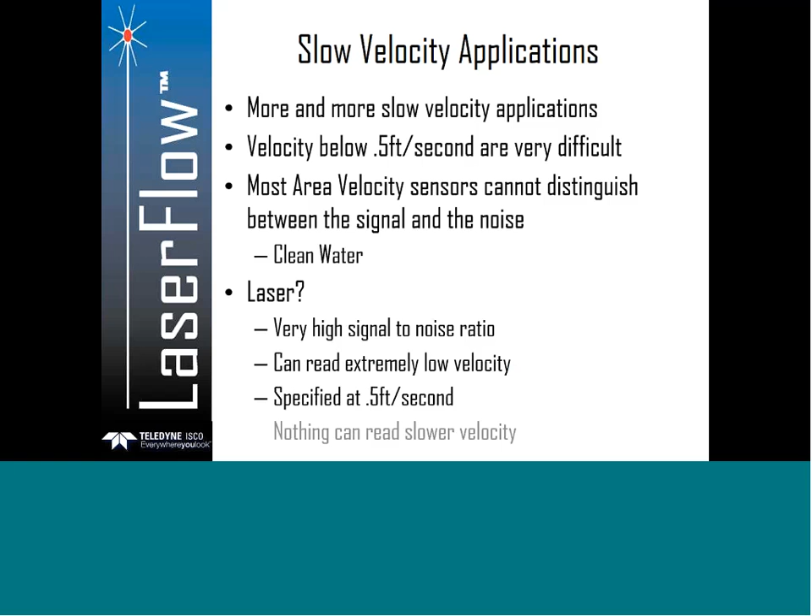Each site will be unique, so I'm not going to say we'll read it all the time, but you'll know when you set it up based on that velocity diagnostic. Nothing I know of currently will read slower velocity than the laser.

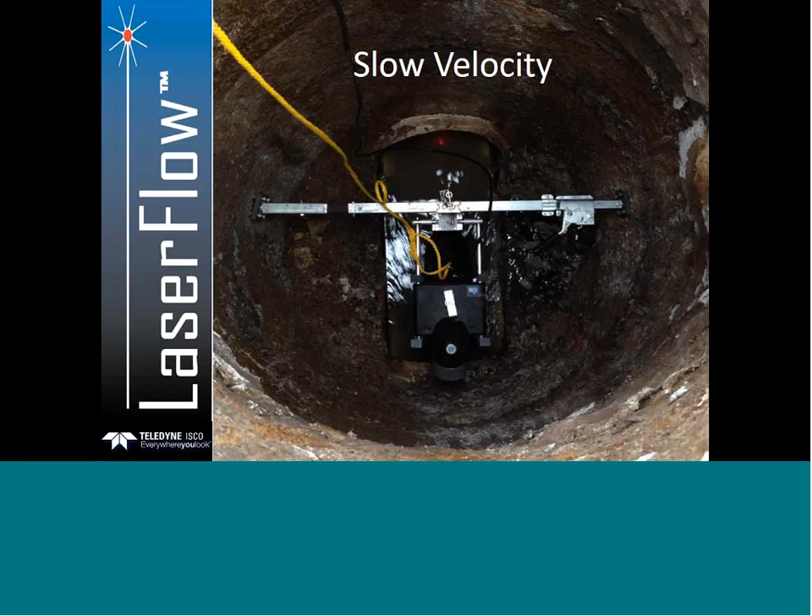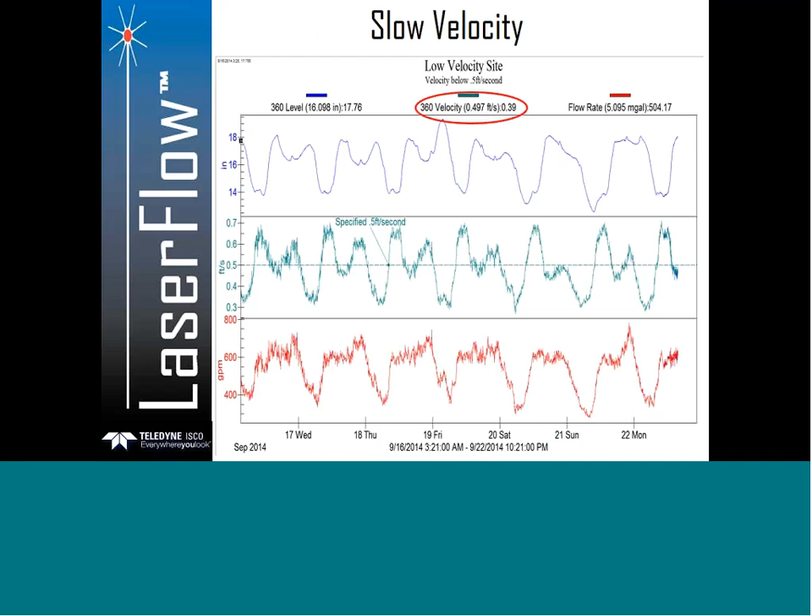Here's a shot using a temporary mount. The laser point is in the water, and that water's like glass, so a very difficult application. In the second pane, the dashed line is our spec at half a foot per second, and we're reading far below that, down to 0.39 feet per second.

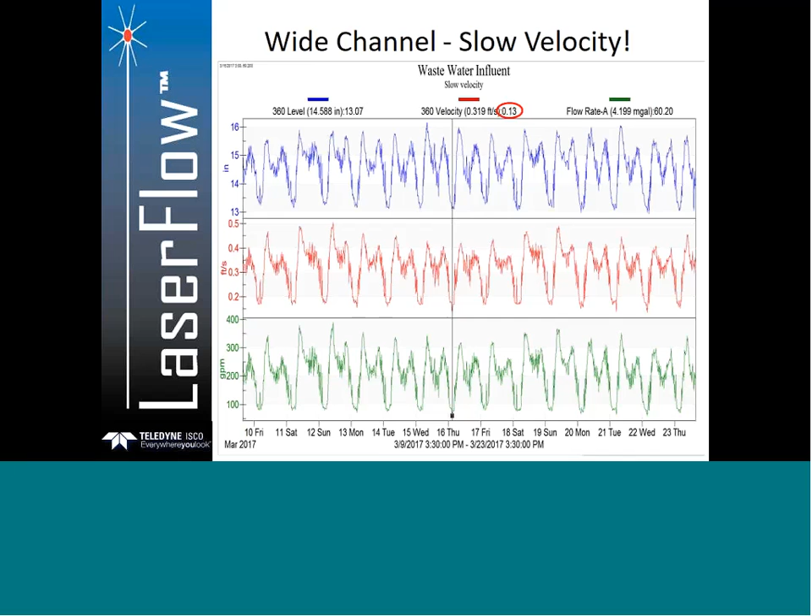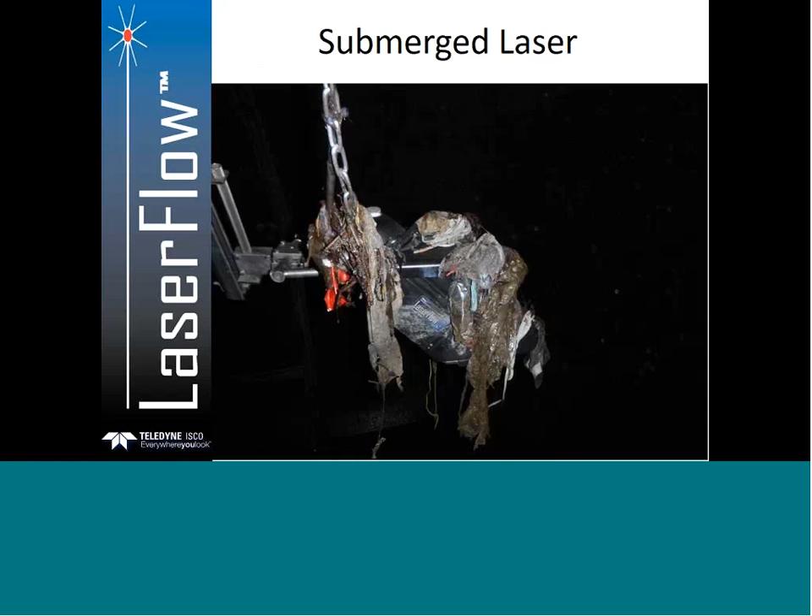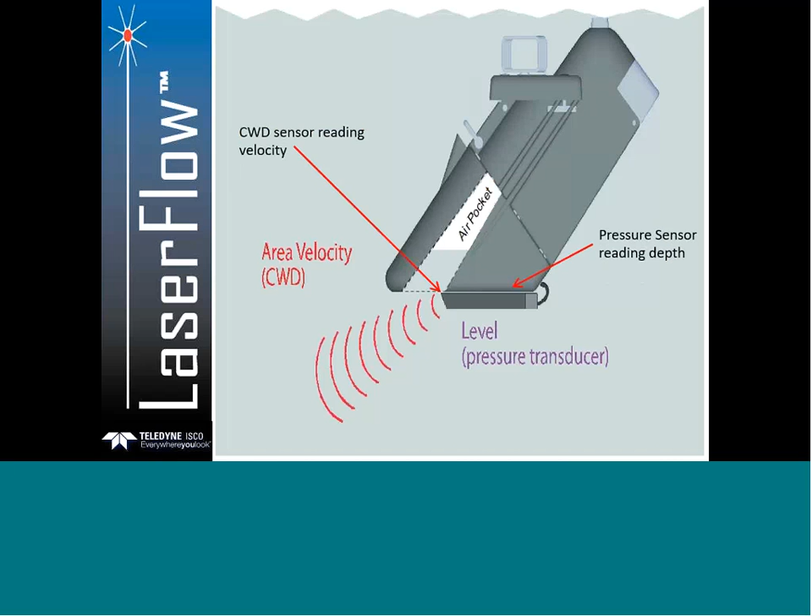So what does the laser do when it goes underwater? It won't read, because nothing's moving where it's looking. But we have a continuous wave sensor mounted on the bottom of the laser sensor itself, with a built-in pressure sensor to measure depth. So it seamlessly transitions from laser to this area velocity sensor when submerged, giving one continuous flow output regardless of which technology it's using at the time. This submerged flow condition has been very successful for us.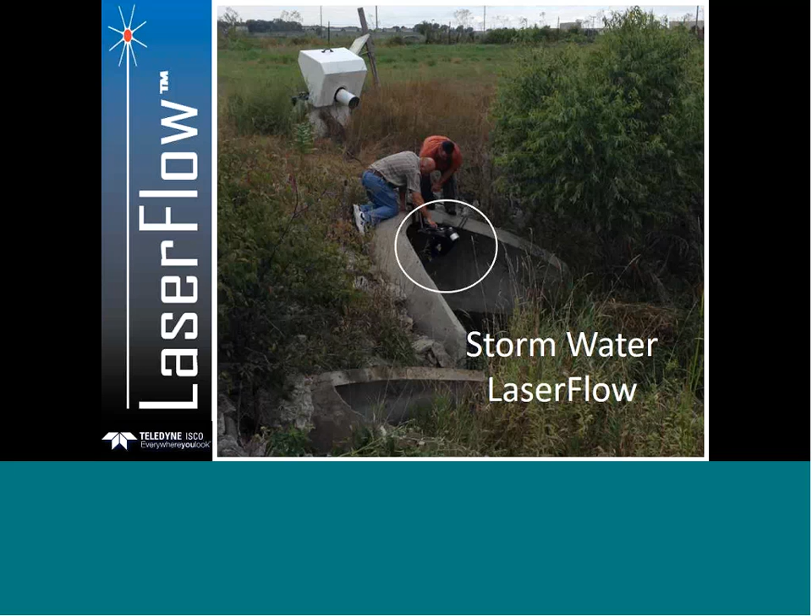Okay, let's talk stormwater. This application was one where they wanted to monitor but weren't going to drill any holes. They used a couple of C-clamps and just clamped the laser mount right to the structure, making it very easy to install as a temporary application.

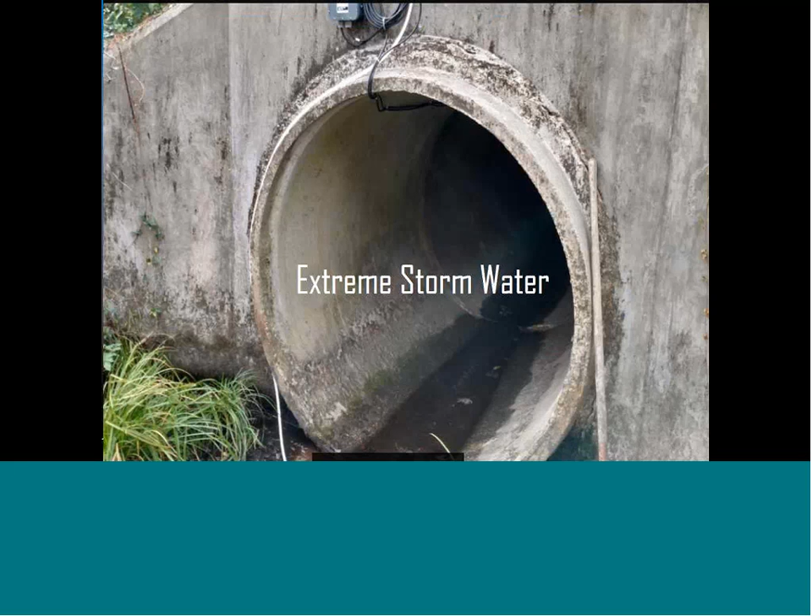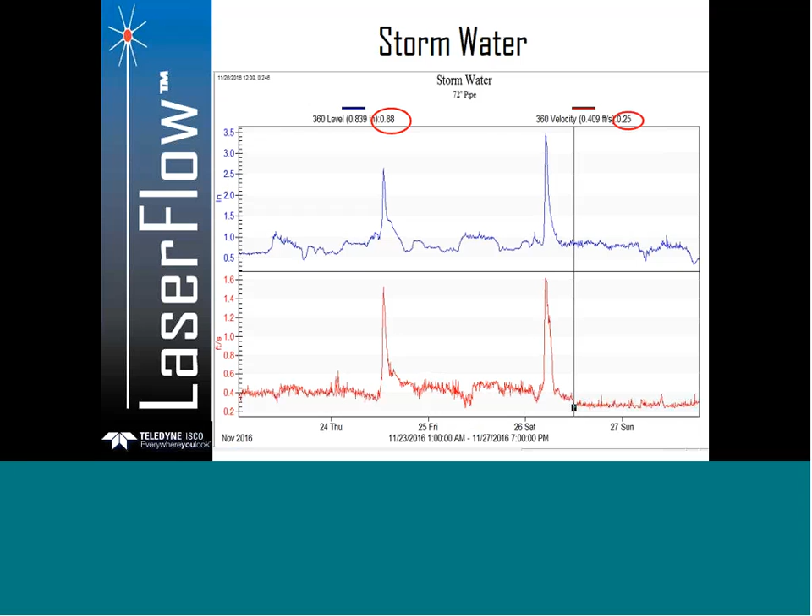This is a USGS project. They wanted to measure baseline flow very accurately, and this is the only thing out there that could handle that low level, that low velocity. Here's some of the data: the level was 0.88 inches, less than 1 inch, and the velocity was an astounding 0.25 feet per second. So clean water, barely a crawl, and the laser was able to read that.

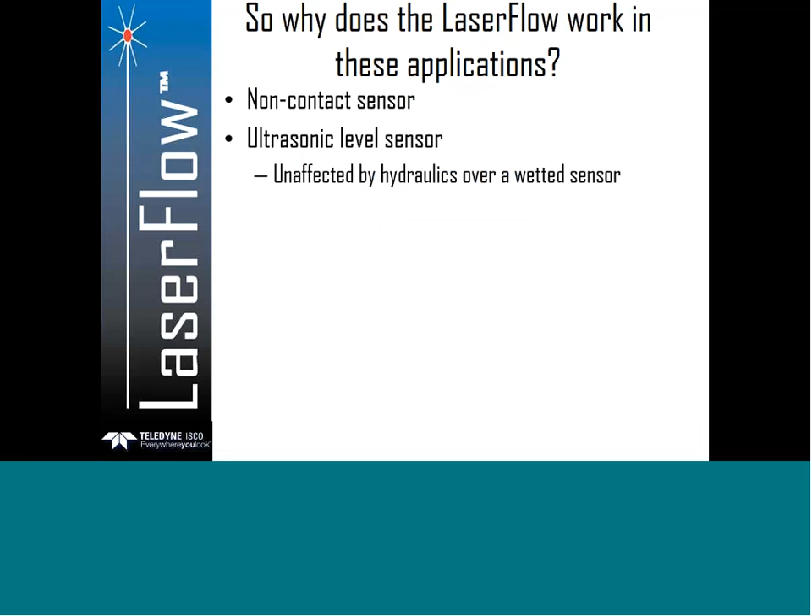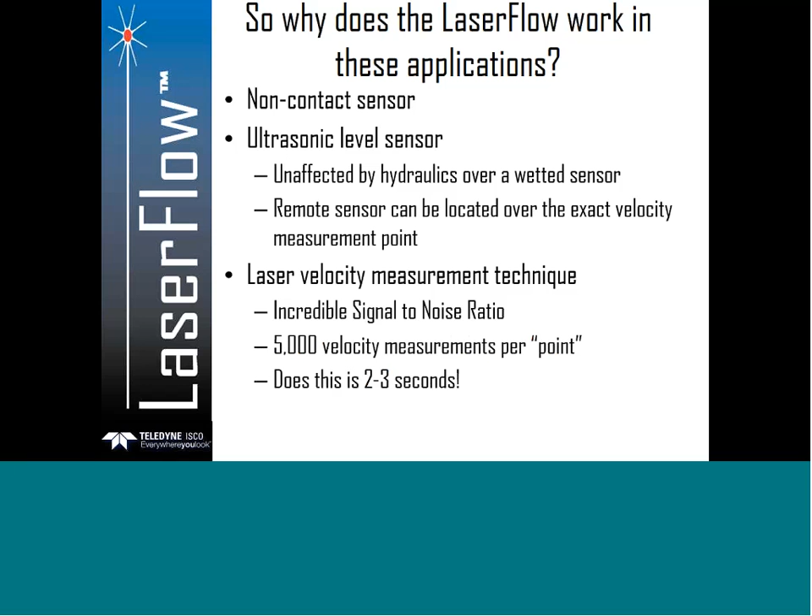So why does the laser work in these applications? A lot of this I've already talked about, but we have a non-contact sensor, using ultrasonic to measure depth. It doesn't care what's happening hydraulically for the most part, like a wetted sensor would. It can be mounted in exactly the same location you're measuring velocity, which is ideal for flow accuracy. And the laser velocity signal-to-noise ratio is phenomenal—it's able to distinguish the signal from what we don't want to look at. It takes 5,000 velocity readings per point in roughly 2 to 3 seconds.

And we can do up to 15 velocity points, so incredible flexibility as well as technology.

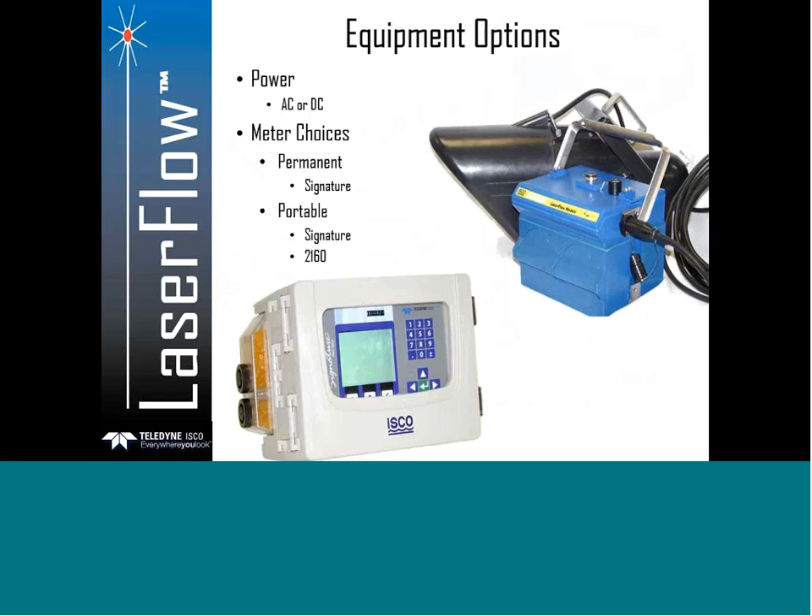So let's talk about signature a little bit. Signature is what we call a smart device. It can handle multiple inputs, up to 9 technologies coming into it for one electronics. But it can also output to a number of different devices: internet, alarming, USB, Flowlink, Modbus for SCADA, analog output as well. And obviously it hooks to a laser as well.

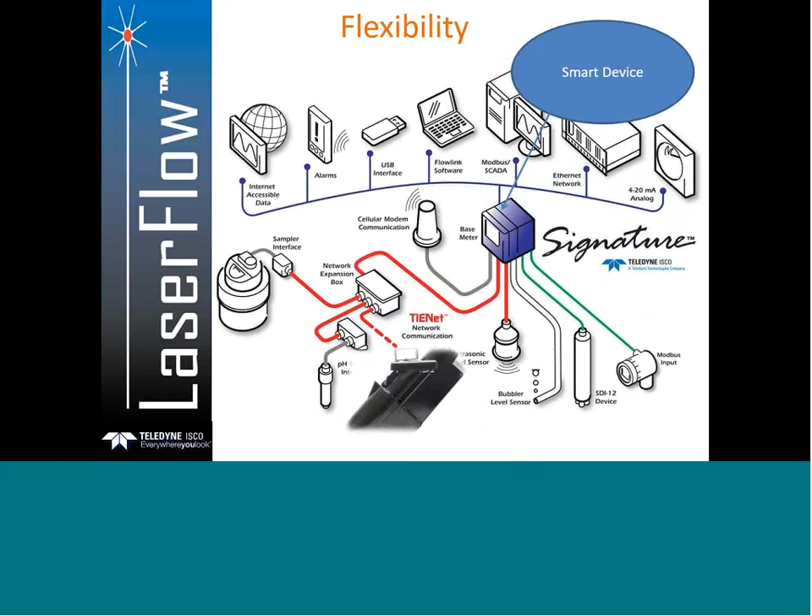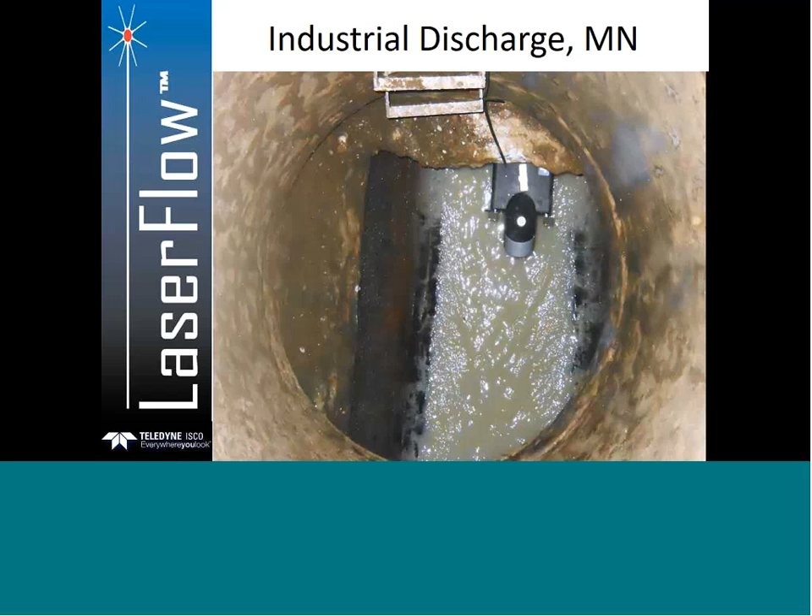So where we're seeing a lot of opportunity and solutions for customers would be industrial monitoring. More and more municipalities are looking for a better solution for their pre-treatment programs. One reason is because every industry has brand XYZ type flow meter, and they want continuity between the data. So a lot of these municipalities have looked at using signature, which gives them the ability to use an ultrasonic. If a customer has a flume and it's working and they like it, they can go that direction. If they don't and they want accurate data without that, they can go laser.

The nice thing about this too is it ties into Flowlink Global. All the data gets pushed to a server that might be on the municipality's server, but the industry can now log in under their own password the city gives them. They can see only what they are allowed to see.

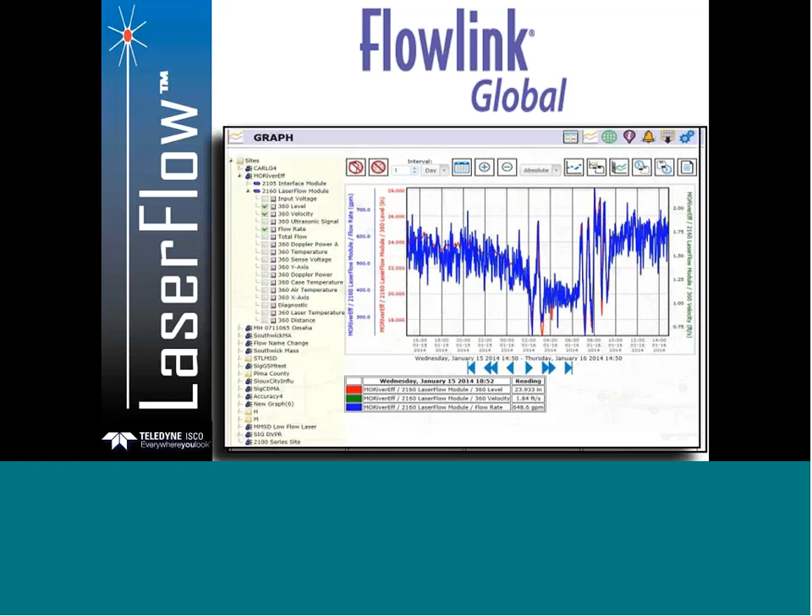In this case, green means everything's a go, yellow means we are not reporting in on the modem, and red would be we have a problem, a hard alarm. A single click allows them to easily graph their site so they can see what's going on and make corrective action immediately. And we have GIS mapping capabilities as well, so for a large flow study or a flow project, a flow service company can have multiple sites out there and at a quick glance see what's going on in their system.

All right, so we're going to wrap up. In summary, the LaserFlow is the most advanced and versatile open channel flow measurement system available on the market today. Like I said, I've been around the block. I've seen them all. I'm absolutely amazed every day when I look at data from the laser and what it's capable of doing. Because of that, it's able to work in applications that people in the past have said there's no way to measure that.

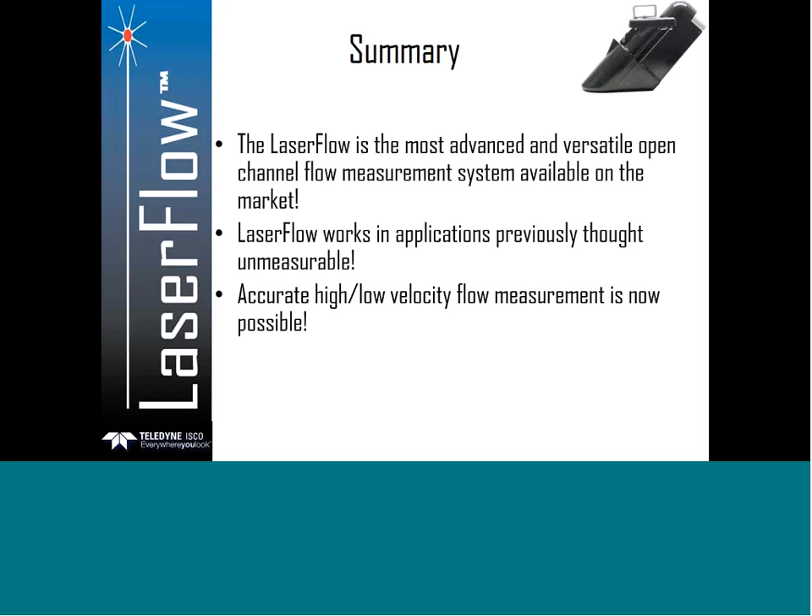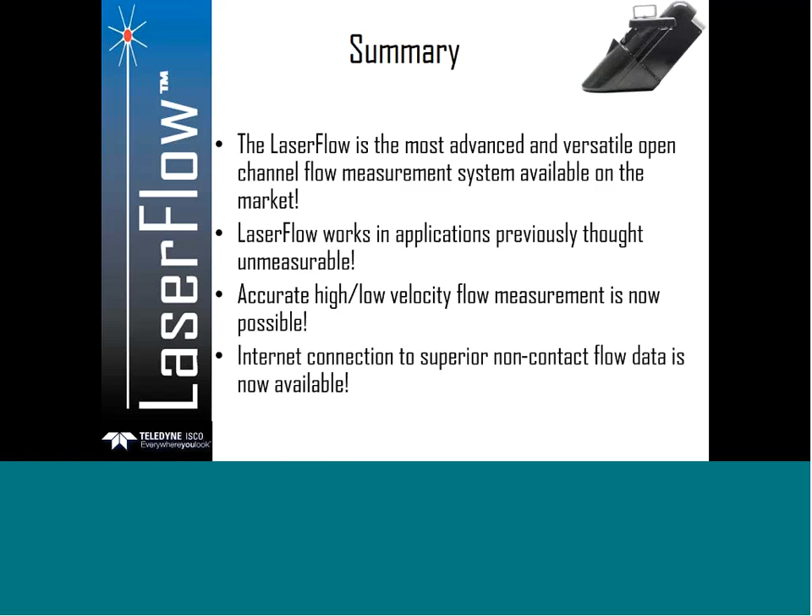We're now able to measure in those types of locations. Accuracy was always in question with non-contact. Now we're able to give you assured accuracy with both high and low velocity flow measurement applications with non-contact. And when you have a wonderful non-contact device like that, having it available on the internet is very, very key, and we have all of that now as well. So really the LaserFlow is going to work in applications where other technologies would not.